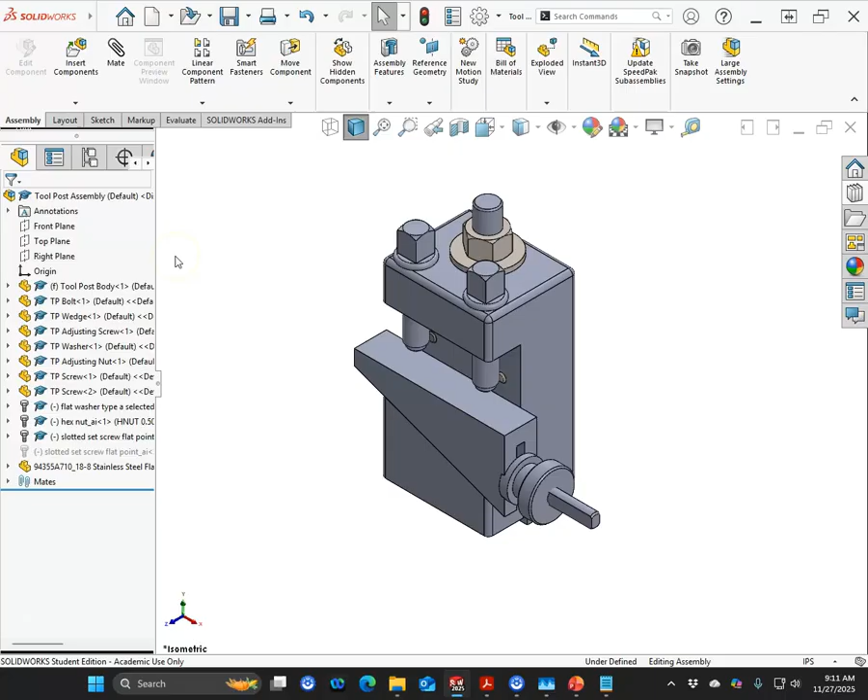All right, we're ready to start our working drawing. So your choice, if you have created a template, then you're welcome to use it. Otherwise, we will use the drawing.

When we hit OK, it's going to ask us once more if you are only seeing the ISO versions, then it will only show standard based on the standard. And if you're using the ANSI standard, it's going to default and you won't see any of the ISO. So I'd recommend if you're going with this default template that you use the B size, just because it doesn't take up as much real estate for the title block.

All right, so it did not launch the model view since I told it previously not to. You are probably looking at something like this. So if I check that box, this will come up automatically. I like the option to be able to do model view or go to the view palette.

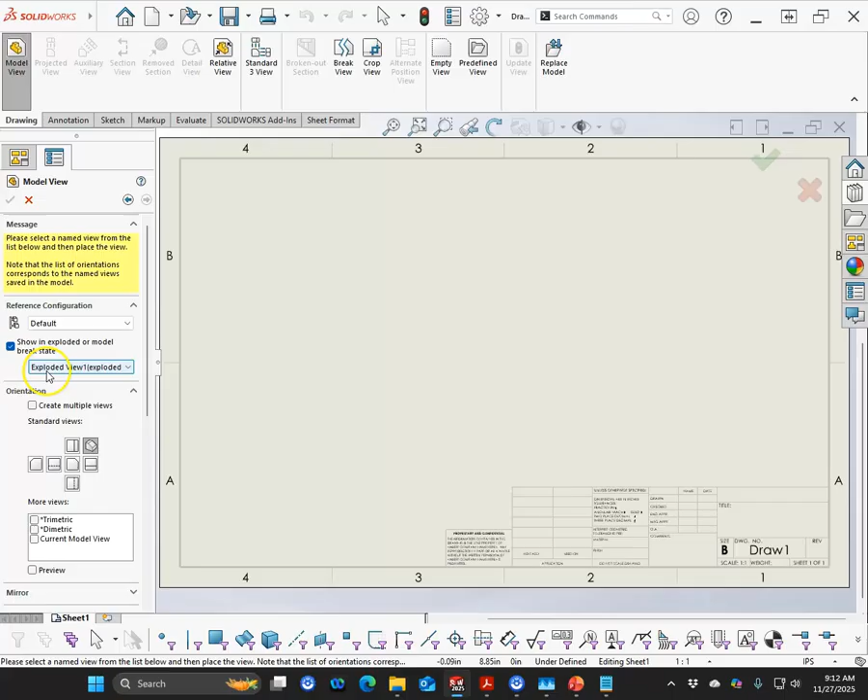So the tool post is open, so we can just go to next. I would like to show it in the exploded state, and there is the exploded view. We really only need the isometric for our first sheet, which is going to show the construction.

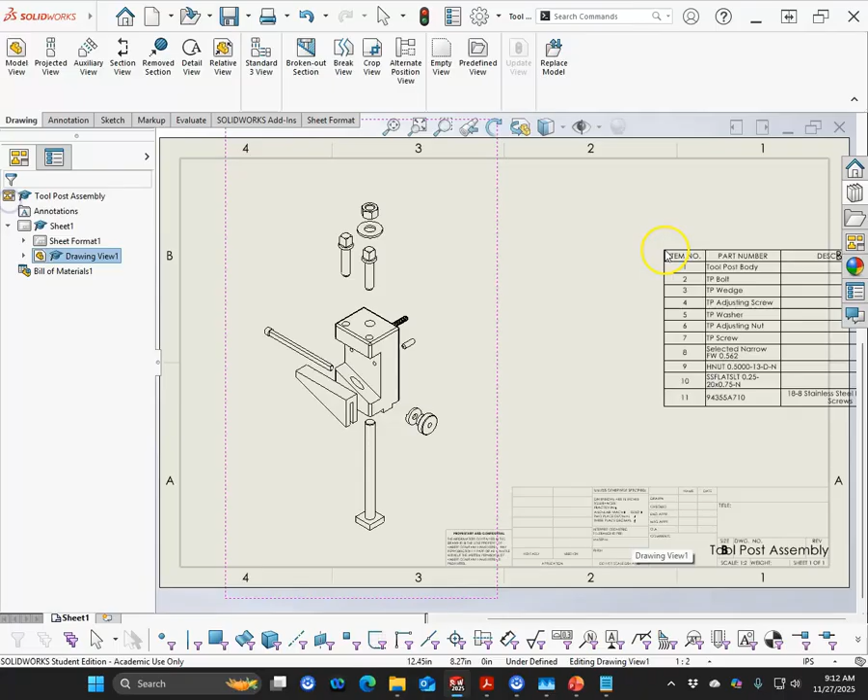All right, so if we right click and go down to the tables, we're looking at the bill of materials. We need to check, we're just going to do top levels. There's not a lot of sub-assemblies here. So the description, this one did get a part number and has more on the description. So we'll go ahead and leave the description this time.

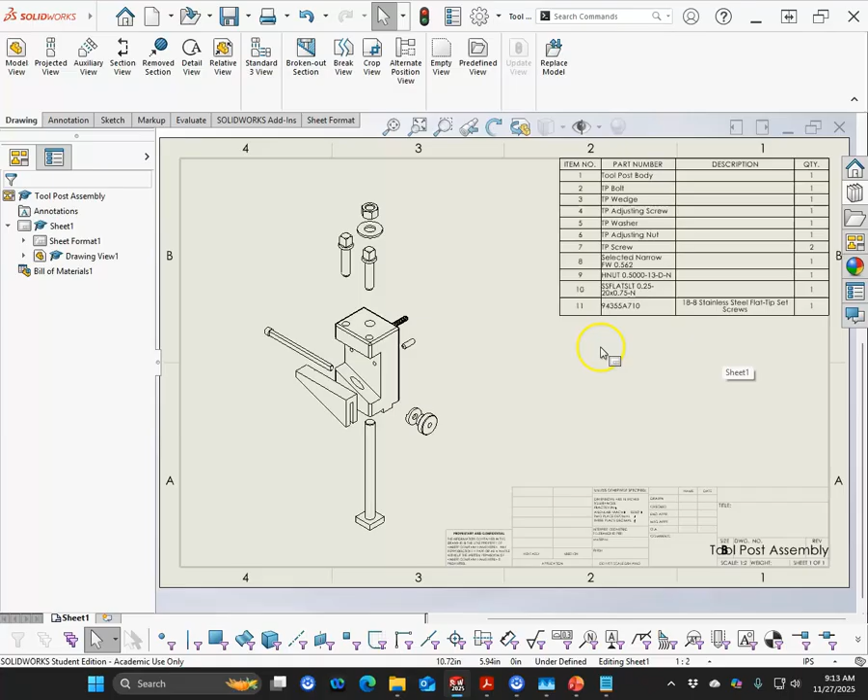We might want to put more in for the washer. SolidWorks abbreviates. Most vendors have no idea what a stainless steel flat slotted set screw is, or the narrow flat washer or hex nut. The abbreviation just doesn't translate well.

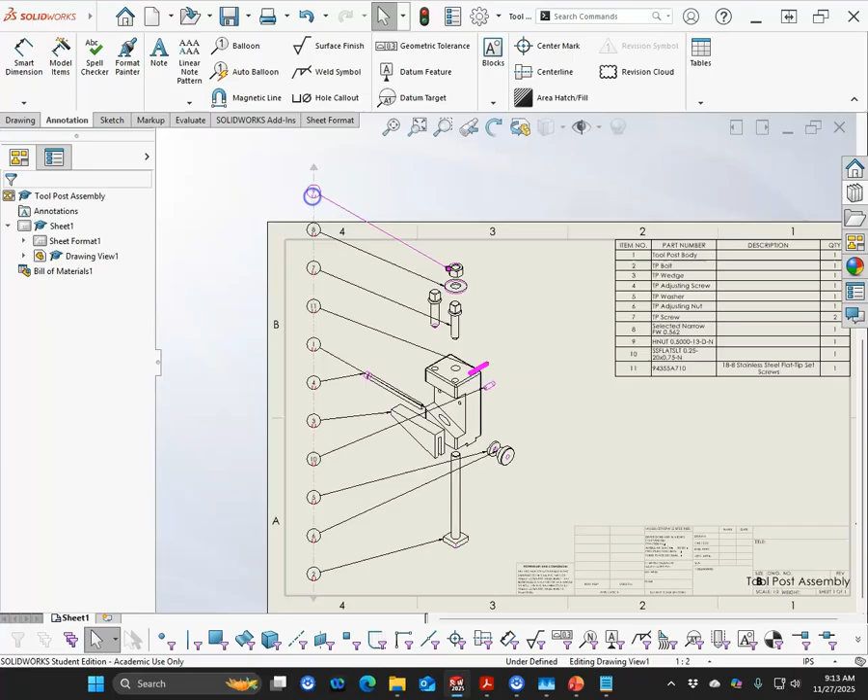All right, so in our annotations, we're going to be looking to auto balloon. I think on this one, I'm going to stack everything to the left, which doesn't look terrible. There's a bunch of stuff crossing, but I think that'll be okay. And when we highlight, we'll be able to take the magnetic line and drag it just a little bit to shrink and stretch those. 1 and 4, those are a little too close for crossing over, so we'll call that close enough.

So on the view palette then, if we refresh, well, I guess I need to pull down and do the tool post, and then it refreshed. I would like just a standard, maybe we'll go dimetric, and we'll put in a dimetric view just to kind of show the collapse state. And I guess it fits in there okay.

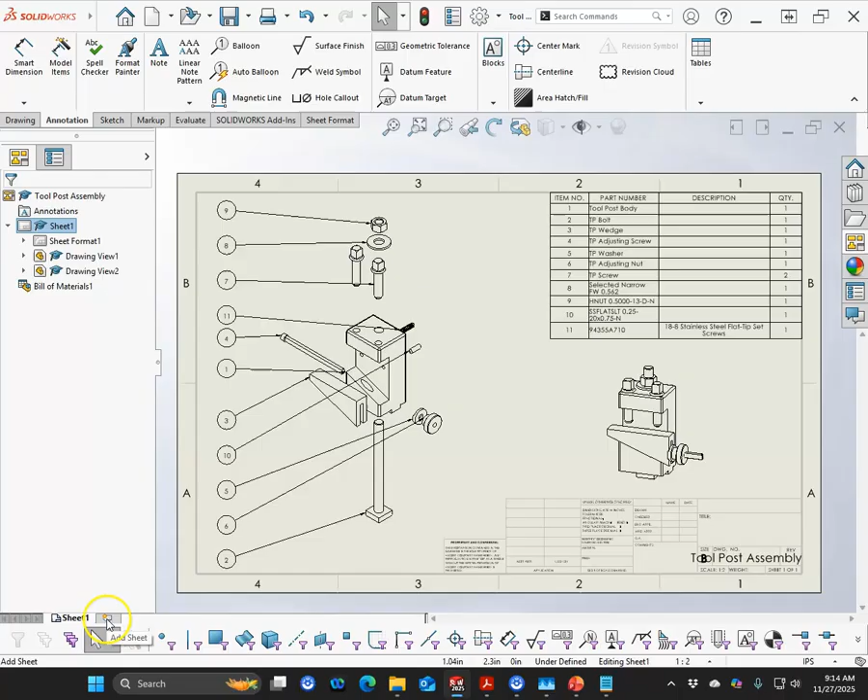All right, so at this point, if you want to do single sheets, you would save this, open up another drawing sheet, put the part in. I still tend towards the multi-sheet, so I'm going to come down to the bottom left and add sheet, the little icon at the end of the row. And then we can go back to the view palette.

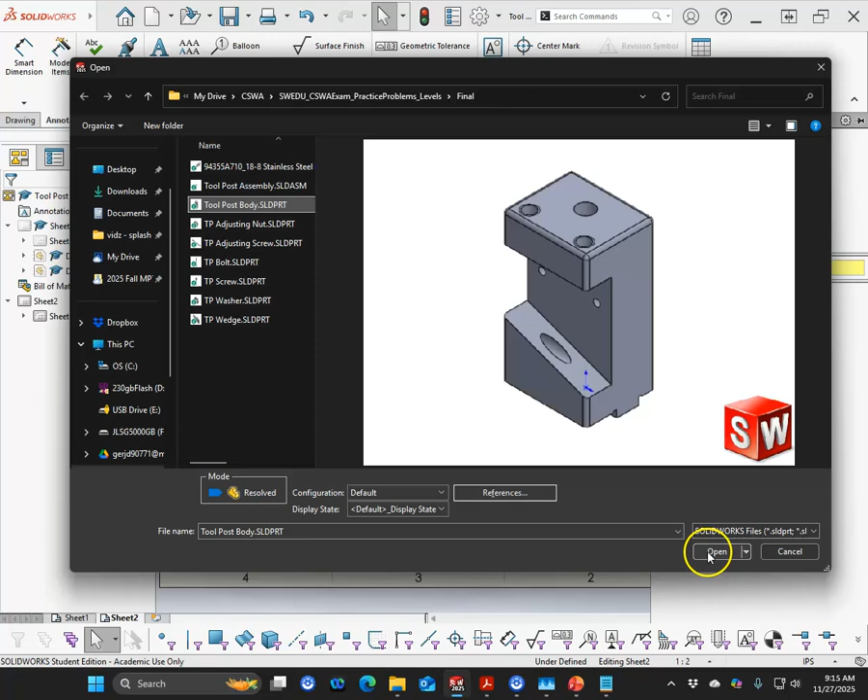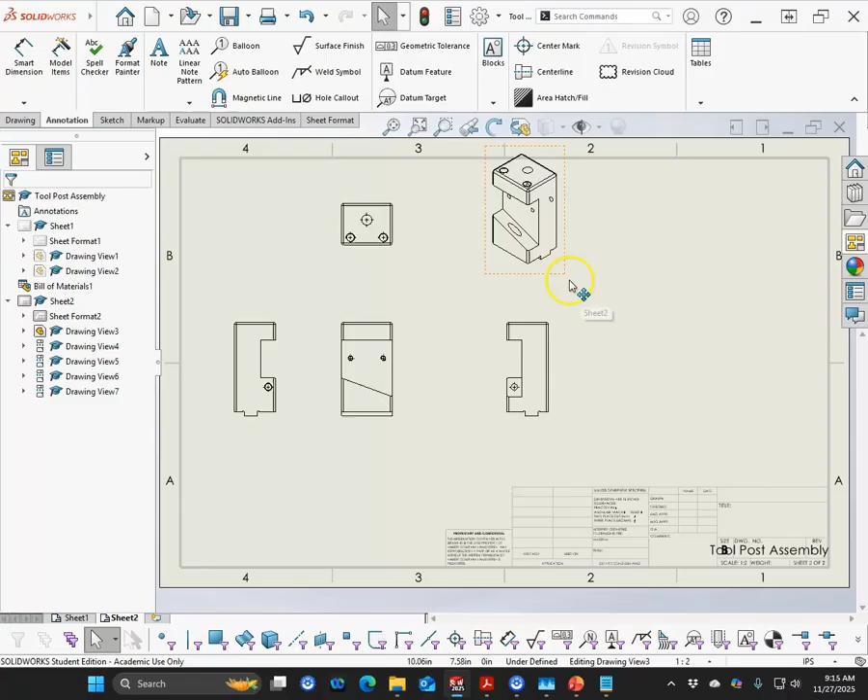And if I use the ellipsis, the dot, dot, dot, then we can bring in the tool post body. And I would like the front view, the right view, the top. Probably not going to need a bottom view, but I would like to detail that a little bit, and the isometric. Okay, so that gives me pretty much everything. I don't know that I need the back view because those are going to be tapped all the way through. We just need the location for them.

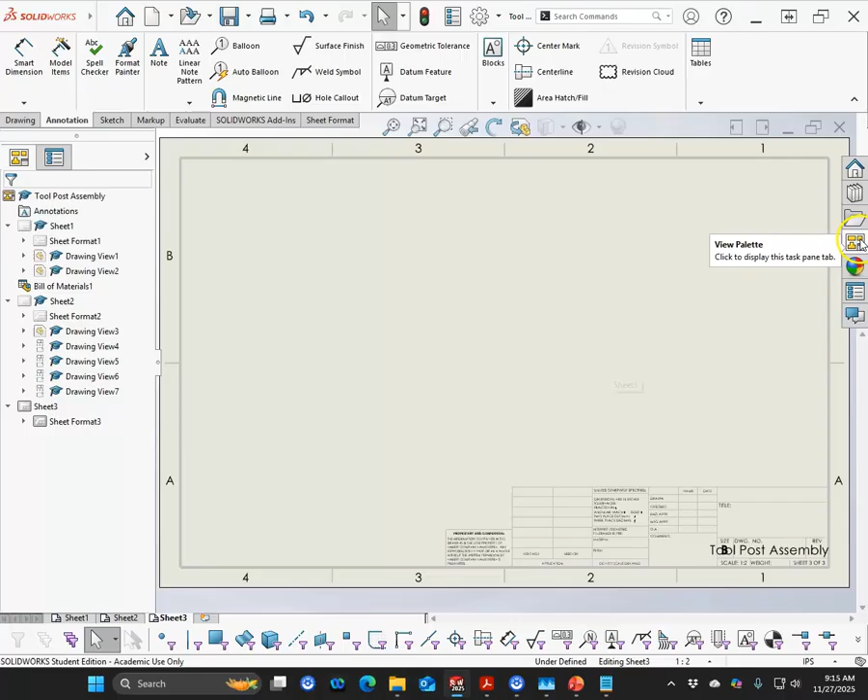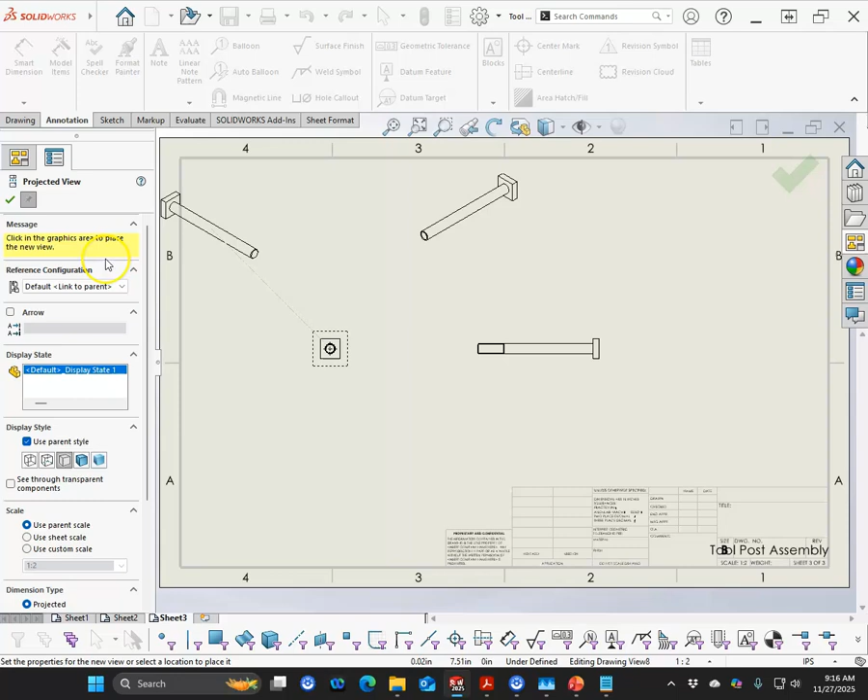Maybe the tool post will be next, so hitting the add sheet to bring in the next, we'll do the dot, dot, dot. And the bolt is going to more than likely be a manufactured part. So even if we modify it, that's interesting, that view. Okay, yeah, I'm okay with that view, just making sure it's not flip-flopping on me. We'll go ahead and bring these in, and then on the next pass, I'll worry about setting the scale.

All right, so we had the wedge, and so the wedge we can do a front, a right, an isometric. I don't know that we need to do a bottom.

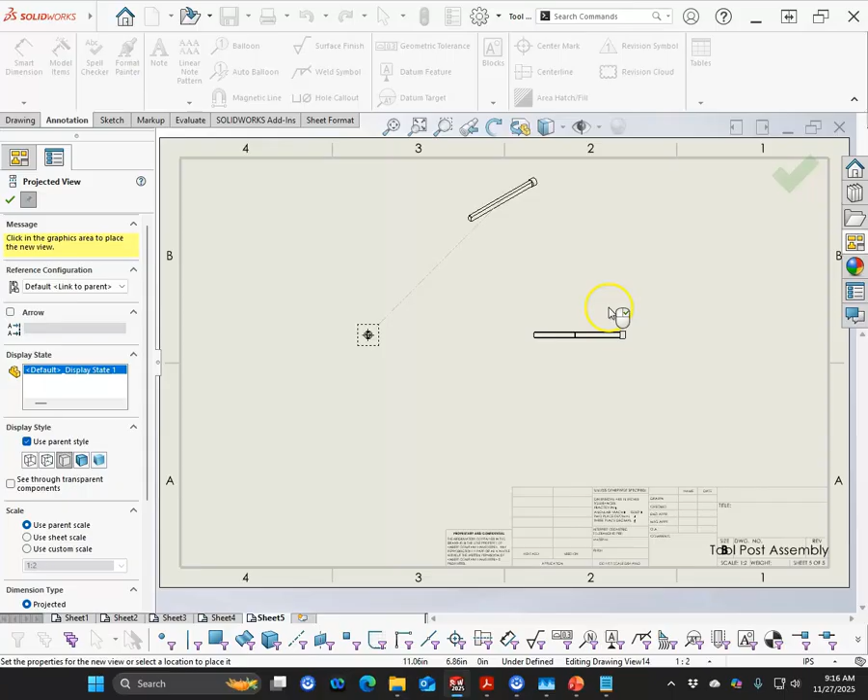So let's, oh, that was the open. I needed the palette. We're going to go to the adjusting screw. And if we go to the right side, again, those are a little bit on the small side for this size sheet, so we'll adjust the scale.

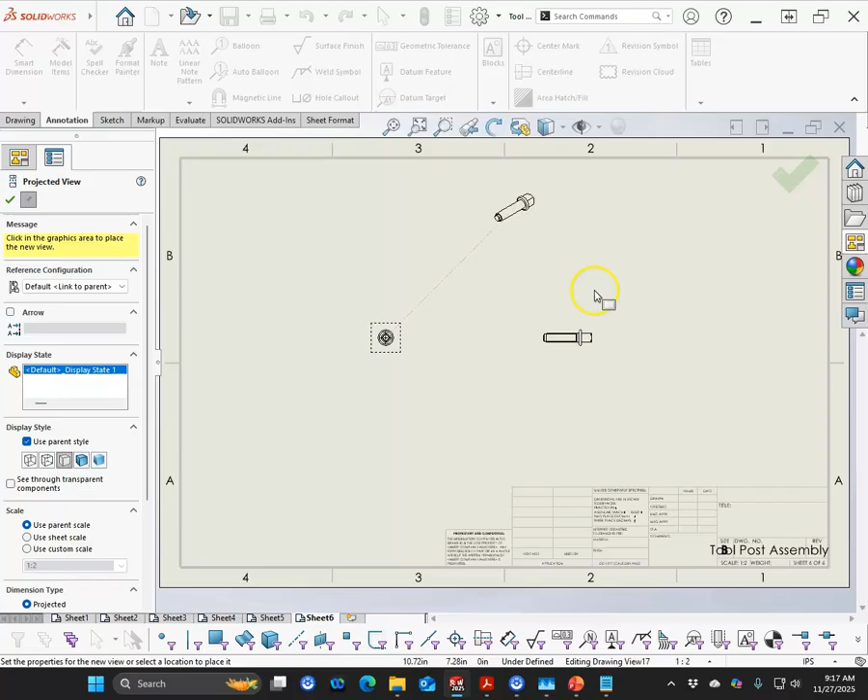So just going around, realistically, this is a really nice piece, and we may be able to find, let's go with bottom, but we may be able to find one of these with a square nut in our vendor. But nowadays I would look at this and go, this is going to be an expensive little piece. I don't know that I can replace this with a purchase part, this one's going to be, on our cost-effective scale, going to be one of the first ones to get analyzed if there's really a necessity to have that

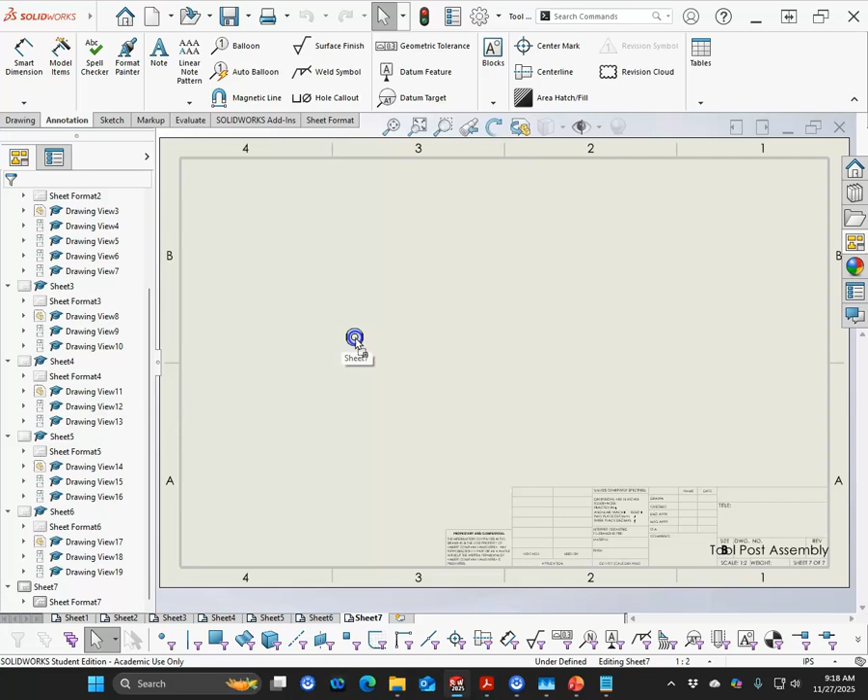that flanged square nut. All right, where did we make it over to? Probably the washer. So let's go to the front. And we'll do something like that because I'm thinking I will probably rotate this just so I can see the side, but I don't know that there needs to be anything different there.

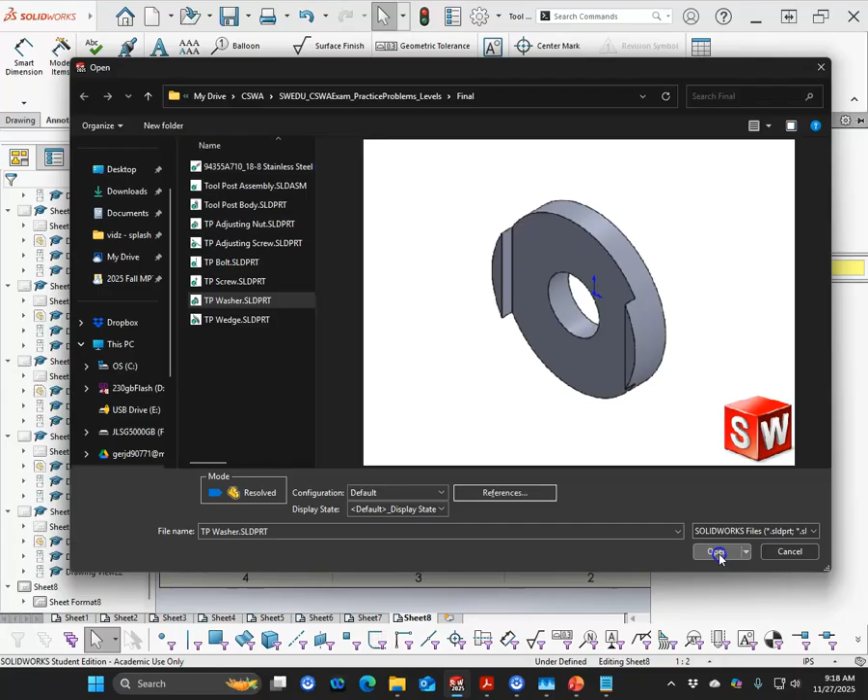And one more, I think we'll have everything. The purchase components, I'm not worried about bringing those in. Oh, that was the washer again. So let's just Control Z.

We need the adjusting nut. There we go.

Okay, so front. Let's go to the back, to the side, to the isometric. Nothing on the interior detail that I'd really need a section view.

So I have the assembly, 1, 2, 3, 4, 5, 6 components. And in my assembly folder, just going to do a check real quick that we have the assembly, 1, 2, 3, 4, 5, 6. And yep, so 1 and 7. All right, that makes sense.

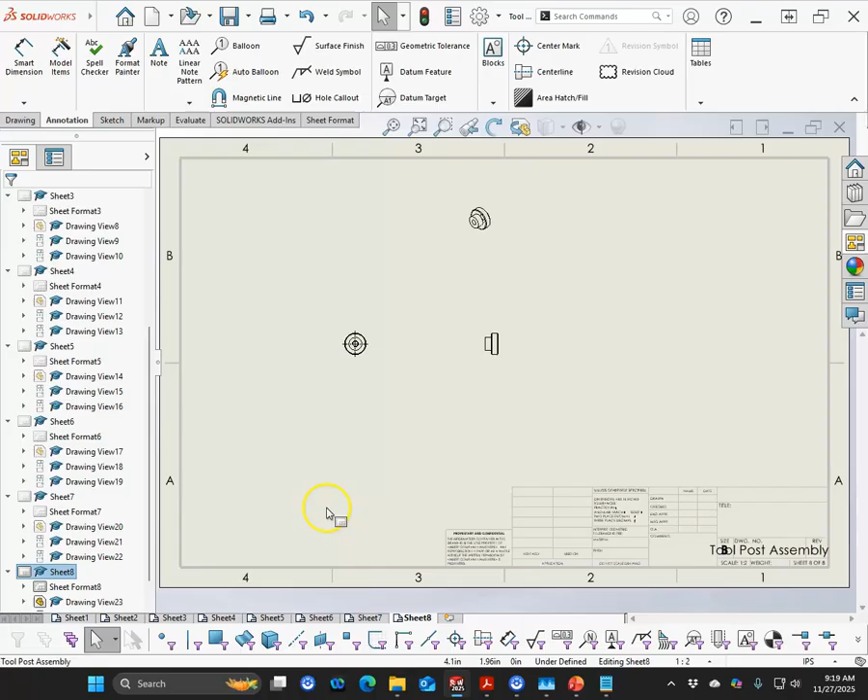So if I'm missing anything, I'll come back and pick it up. We can go back to our list. So the tool post body, the bolt, the wedge, adjusting screw, washer, adjusting nut, screw, and then the set screws.

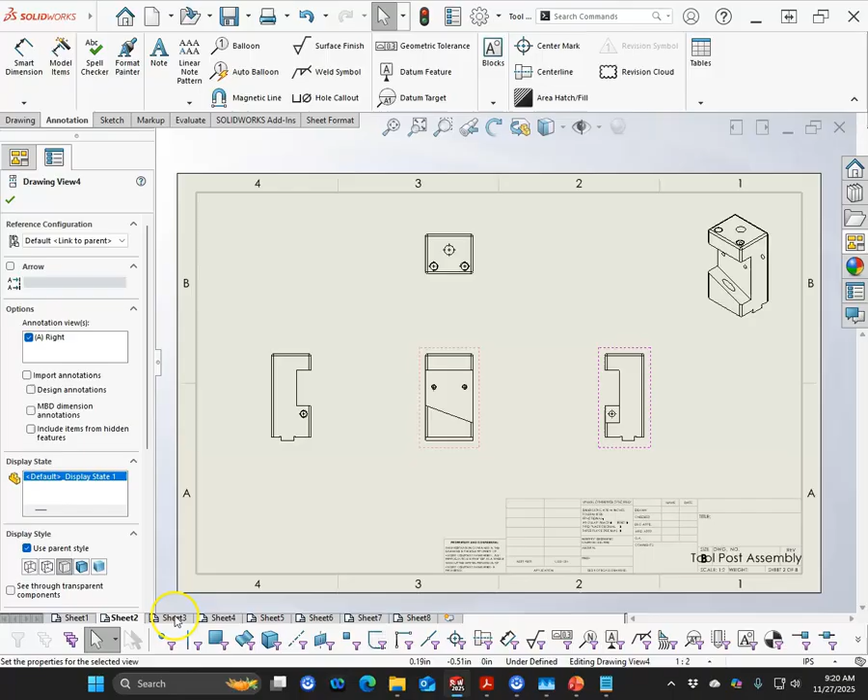All right, so that one looks reasonably well sized. Don't think that we're going to need anything different there. Let's go 1-to-1 with this. I'll probably go with the isometric view back to a half scale.

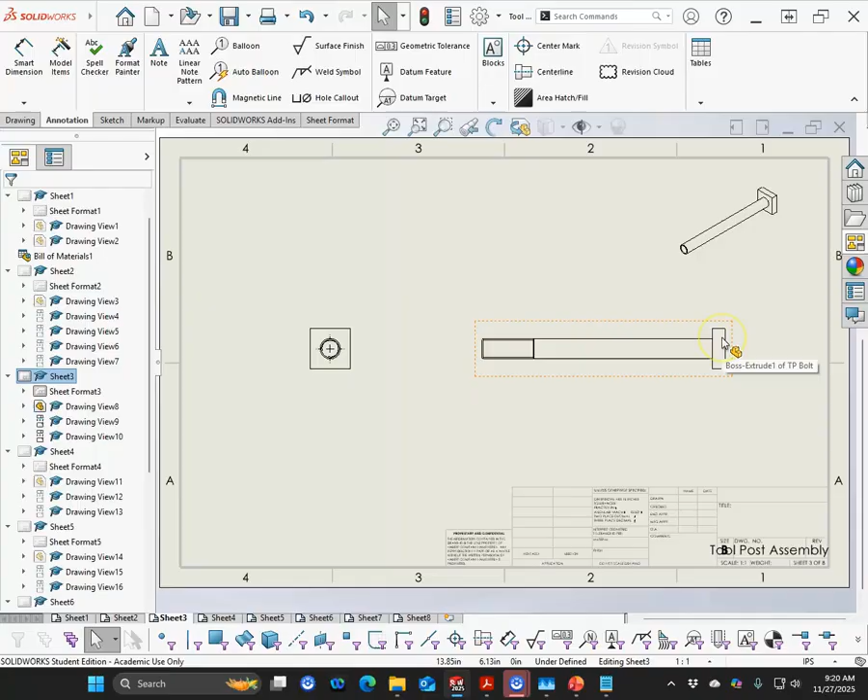I mentioned on the manufacturing side of this would be one that I would consider making the shaft with the thread and then the block, and either pressing the two together and welding it, because removing that much material to make the shaft and the thread falls back into the is it cost effective question. I think we could probably weld it or secure it in such a way that it provides the clamping force we need to position the tool post.

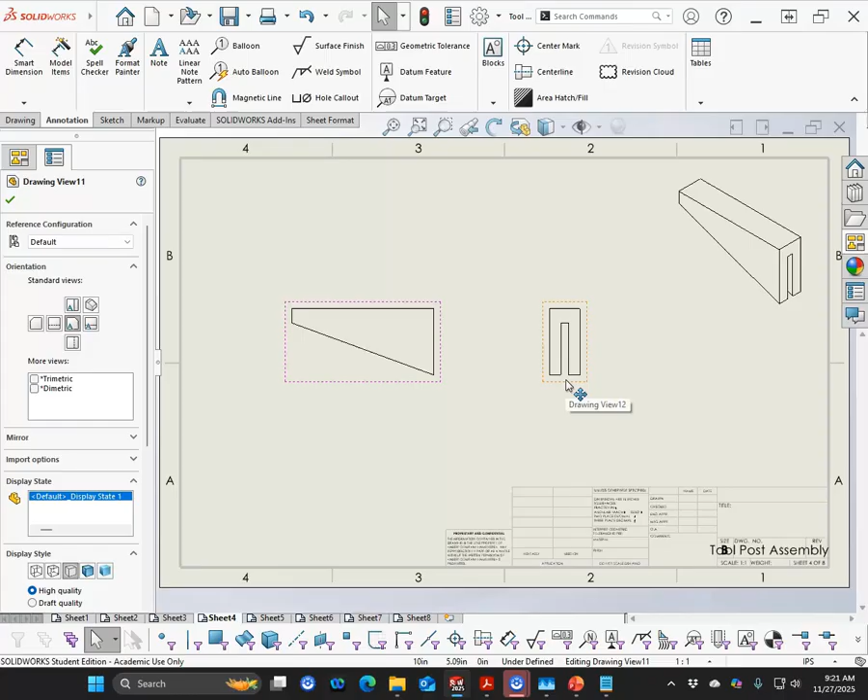All right, so those all look pretty good. I think we got enough room. With the alignment, notice the front view is going to be the parent, and the child views are going to move with it. So whenever I move it, I see that little line indicating that it is a child view.

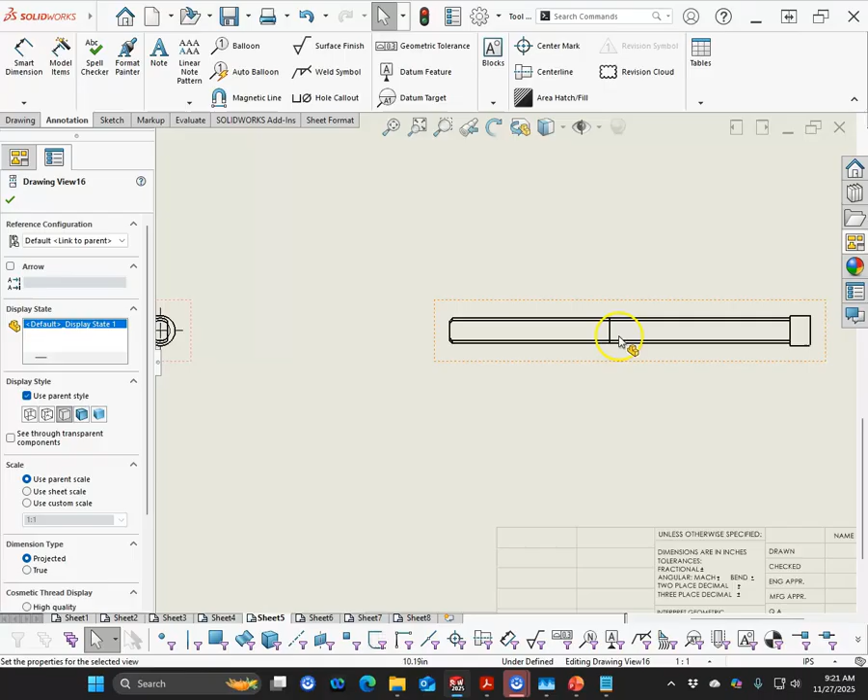So let's go back to the one-to-one, and even that one may be a little bit small. So don't know what that line is - the cosmetic thread. The cosmetic thread did not go all the way down. All right, so that's an indicator that I need to open that part up and make an adjustment.

So on this one, maybe we would go 2-to-1, so we have a better view, but that one looks a little bit big. So let's go to the custom scale and 1-to-1. And same thing, let's go to 2-to-1.

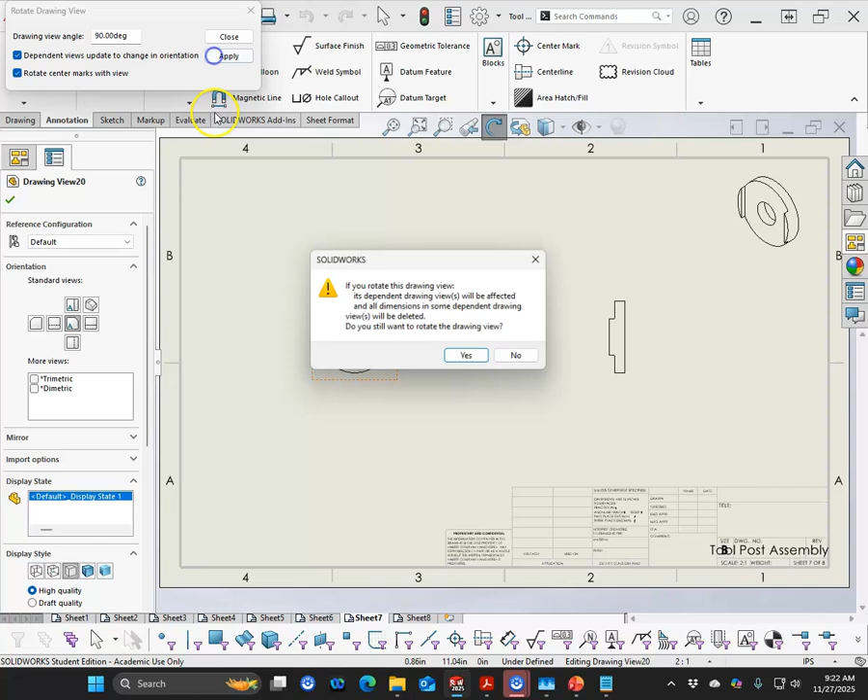And that one I don't see as being very intrusive over the view, but I do want to rotate that. It's always going to warn you whenever you rotate, so try to do this before. So now I have the ability to dimension that, but if I had applied dimensions to this and went to rotate it afterwards, it would delete those dimensions.

And then the last one, again, we'll go 2-to-1. All right, so I think we've got everything. So going through this process, setting these up, let's go ahead and save this. This will just be the tool post drawing.

Again, name them what makes sense to you. But going through this process, my first pass on the drawing just kind of gets everything in. The second one, we set the scales, add additional views if we need them. Then I have the exploded view and my bill of materials to refer back to and see if I've missed anything.

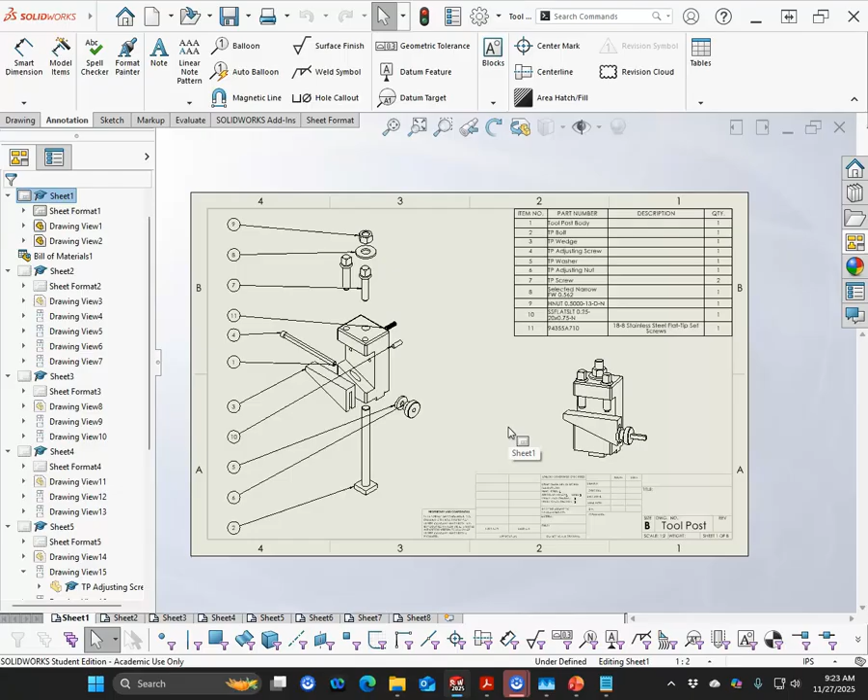Again, the 3 purchase parts - actually 2 purchase parts - we're not going to mess with as far as making a drawing for. We've got a part number. We're going to put a part number in the description of what we've selected, and that just becomes something that goes through whatever that procurement process is.

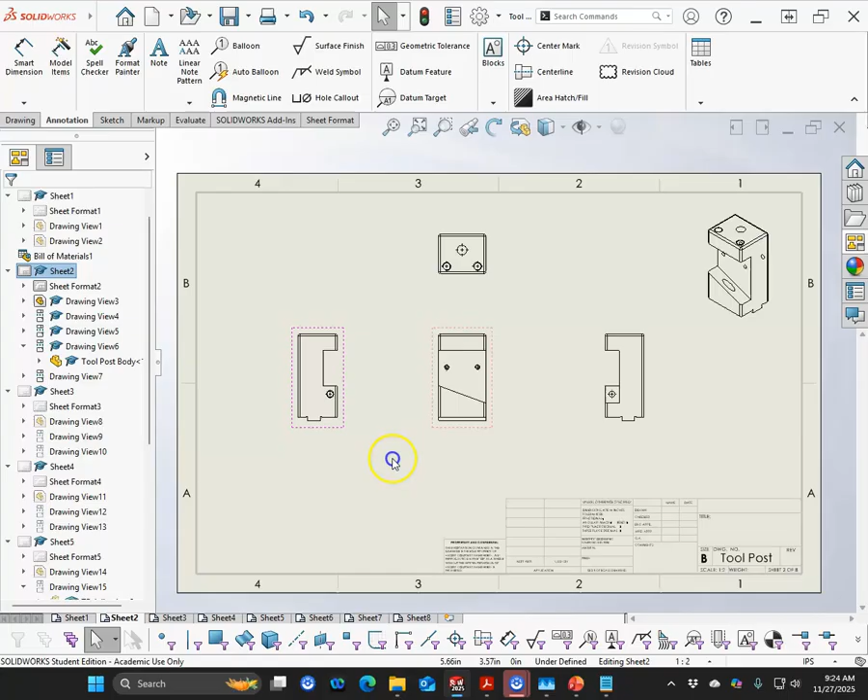All right, so again with the alignment, notice that the parent view kind of moves and the other views move to it. If I'm moving just one, it's showing it left and right, will not move up and down. So we haven't had a need to break alignment, but on the right mouse button there is an alignment option, and we can either add or remove alignments if need be.

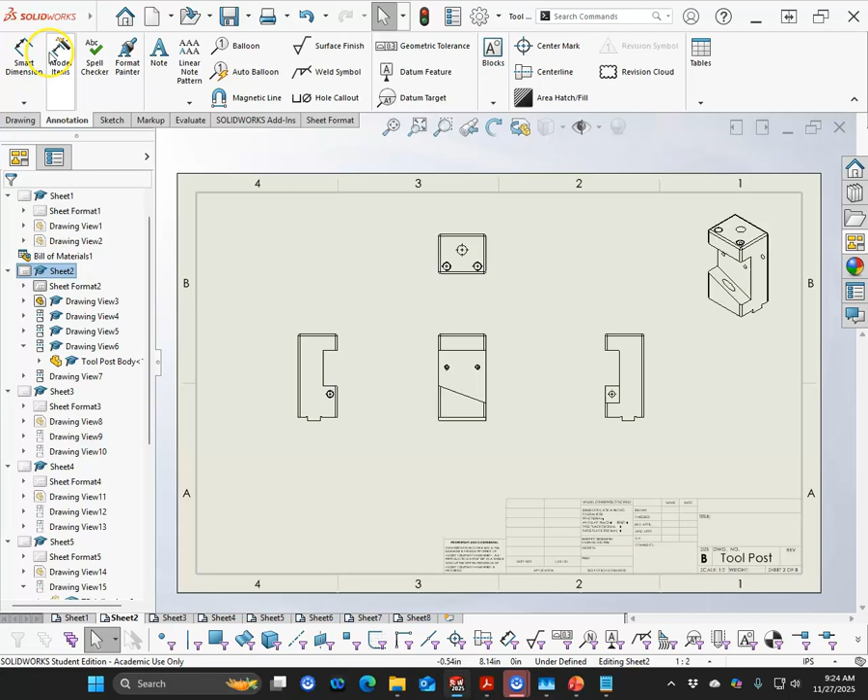All right, so we're ready to start putting dimensions in. The requirement for the final is that you put enough dimensions in to show me that you have a pretty good understanding of the process.

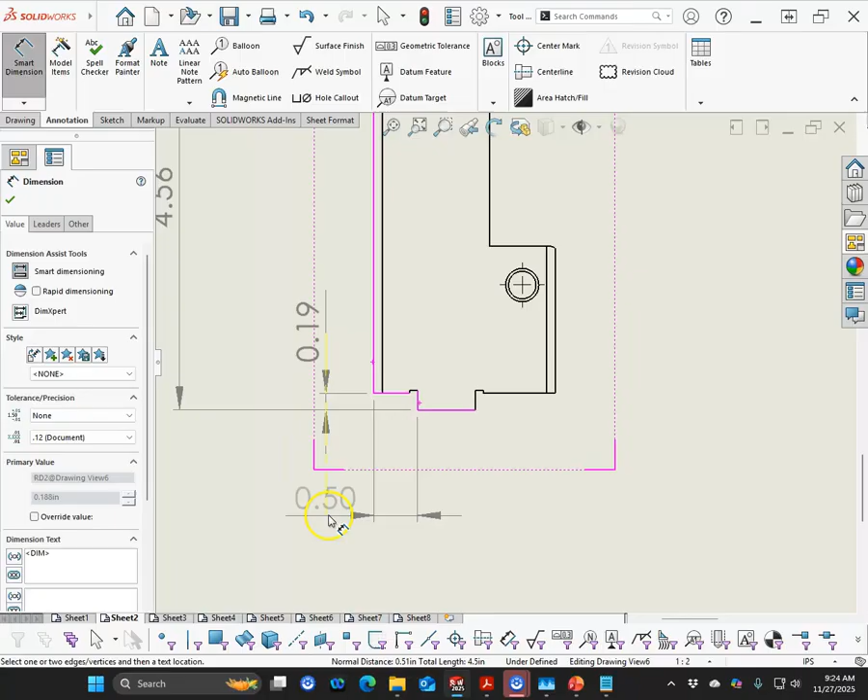I'm going to go through my normal process, what I would do for just about any drawing, which is to just get the dimensions in and then refine the process, since that's probably going to be a toleranced item there. We'll bring it out. Normally I'd pick the baseline and just go to that size, but the variation, we'll see what happens there. All right, so the overall, and we already have an overall there, so I don't need it.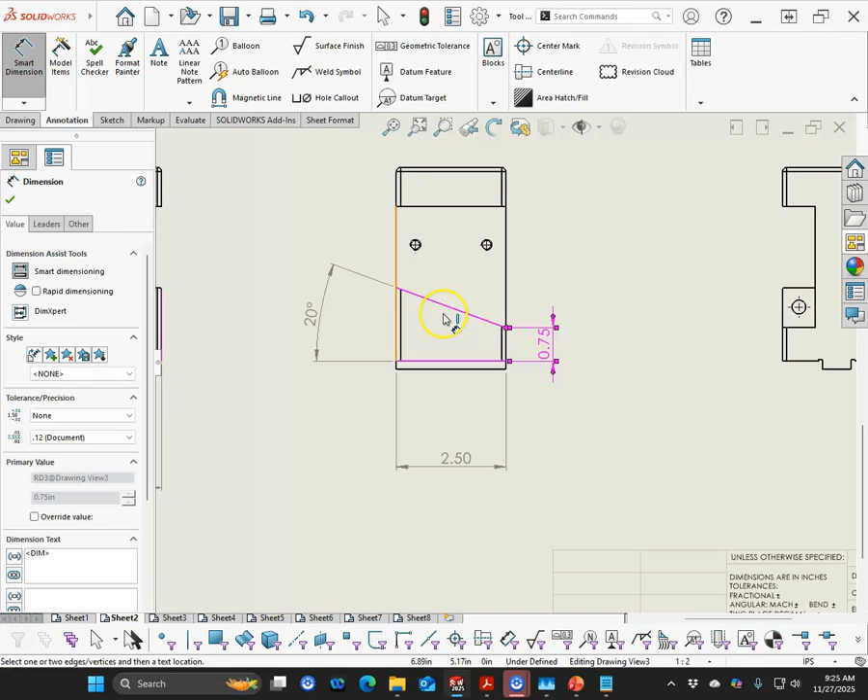We will need the angle. And let's go with a distance from there to there. Really that can float, it doesn't have to be too exact. The one thing that kind of jumps out is I will probably need a detail view.

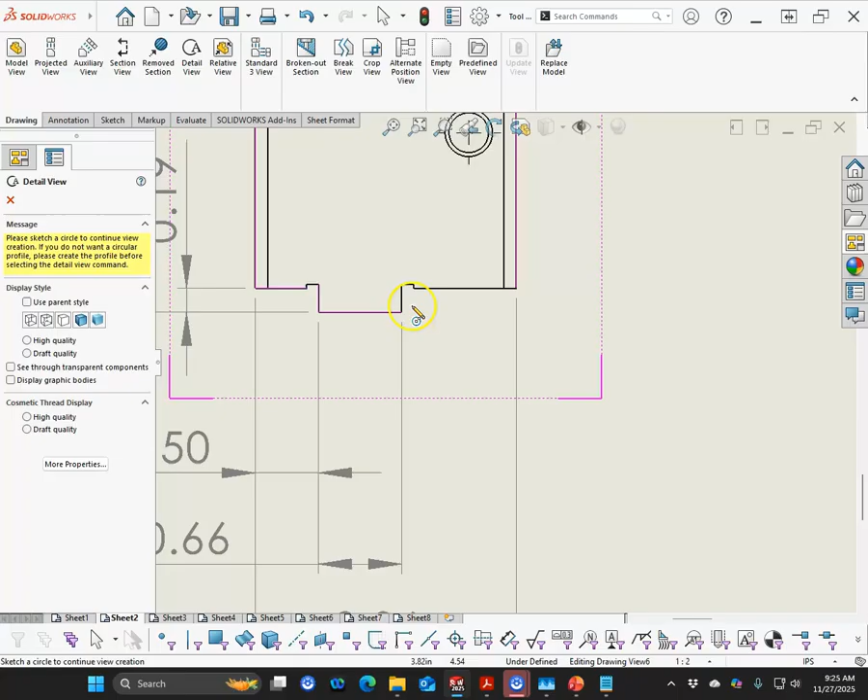So let's go back into the drawing, and we're going to pull a detail view so that we can highlight that item and make it a little bit bigger. So the custom scale, let's go up to 2 to 1.

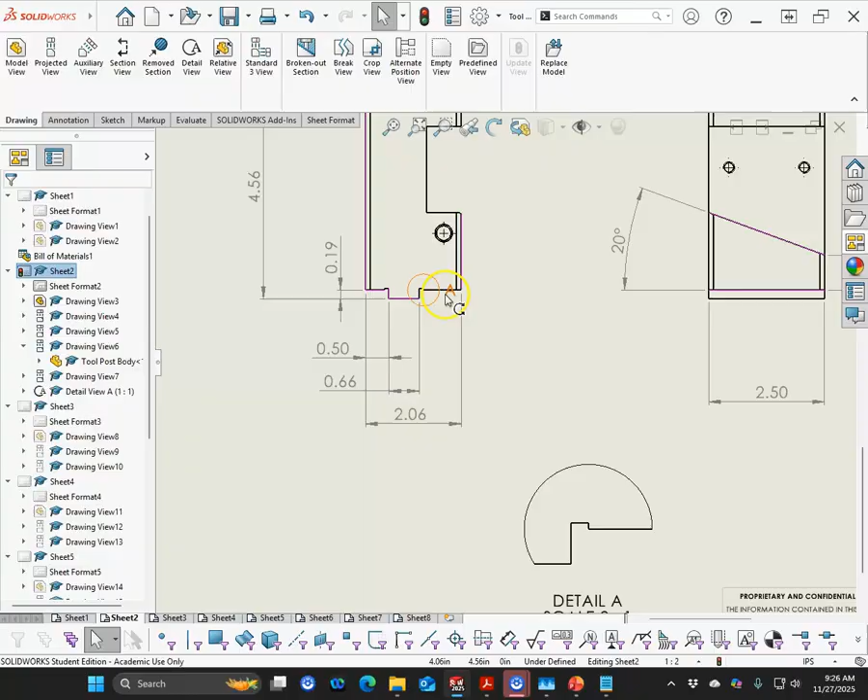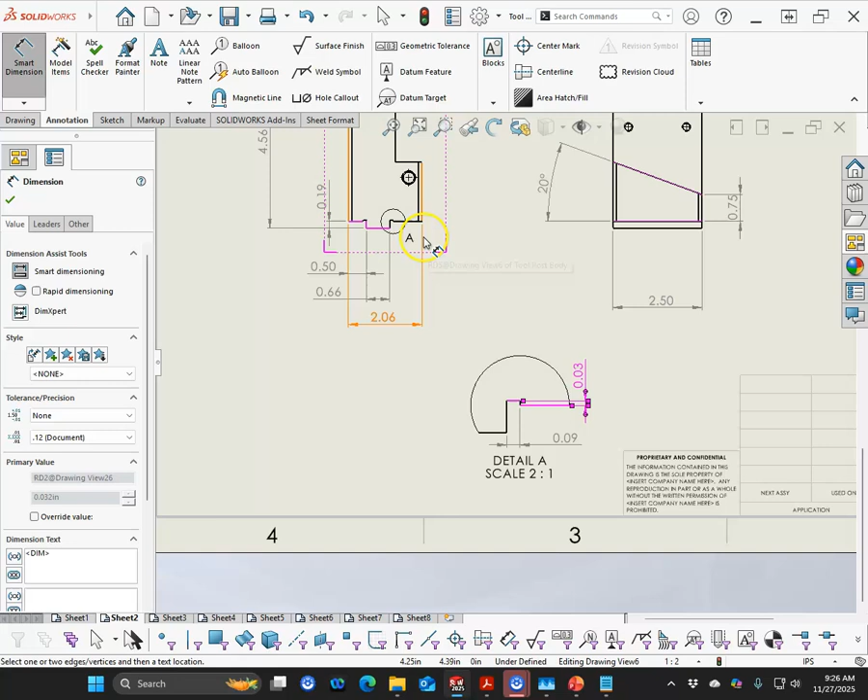And we'll pull the label out a little ways. The reason for that is it's not overly critical, but we just need that relief so that whatever slot this is sitting in, that geometry doesn't hit a sharp or try to rotate it or generate any kind of angle because it doesn't seat correctly.

On these guys, probably will pull them again. I don't know that they're that critical, and since I got the angle, that means I got the center mark. And we just need a couple of location dimensions.

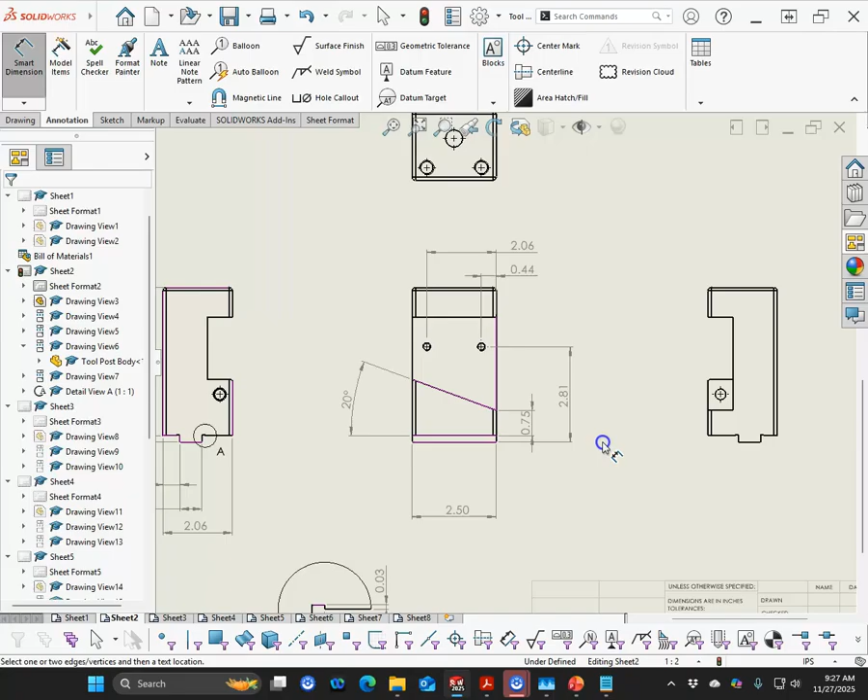If you're using the ANSI standard, yours are going to be inside of the center line, or on the outside where this ISO lies on top of it. Not sure what the dot was there, but we'll go ahead and put these in.

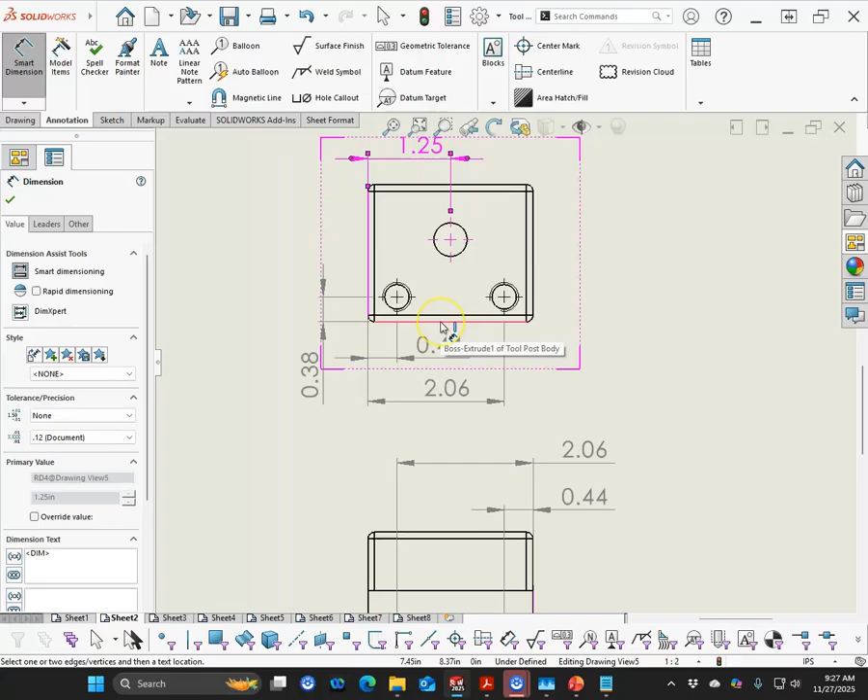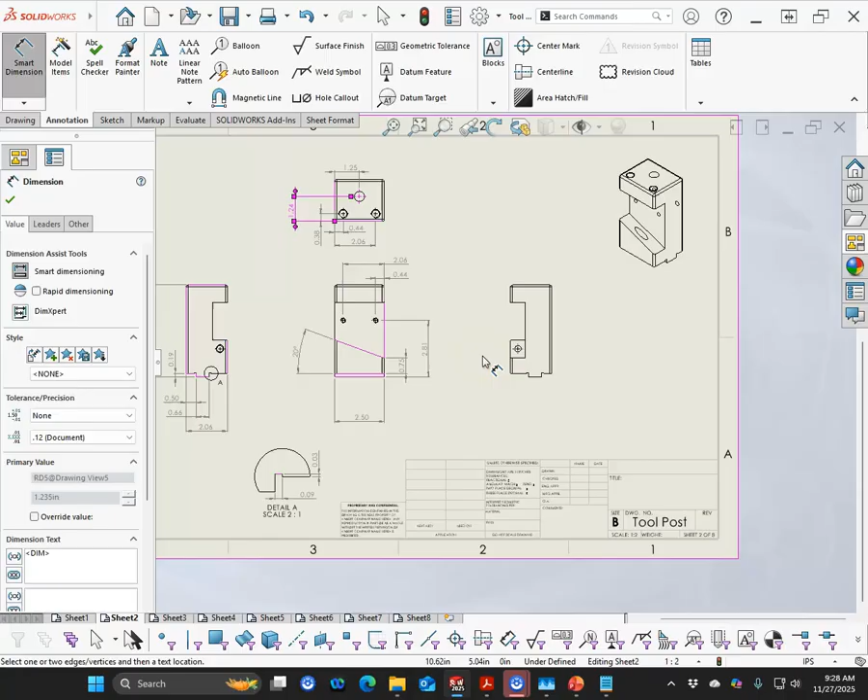Since I pulled that off of the front, we'll just go ahead and make that the datum. All right, so we've got those. Comes back to what do I need to do on this one? Actually, it's kind of looking like I don't really need that view, but let's go ahead and leave it for now.

Yeah, I want to put something over there. I'm just not sure what. I'm going to say maybe this tolerance for the plus minus dimension that we'll need on that.

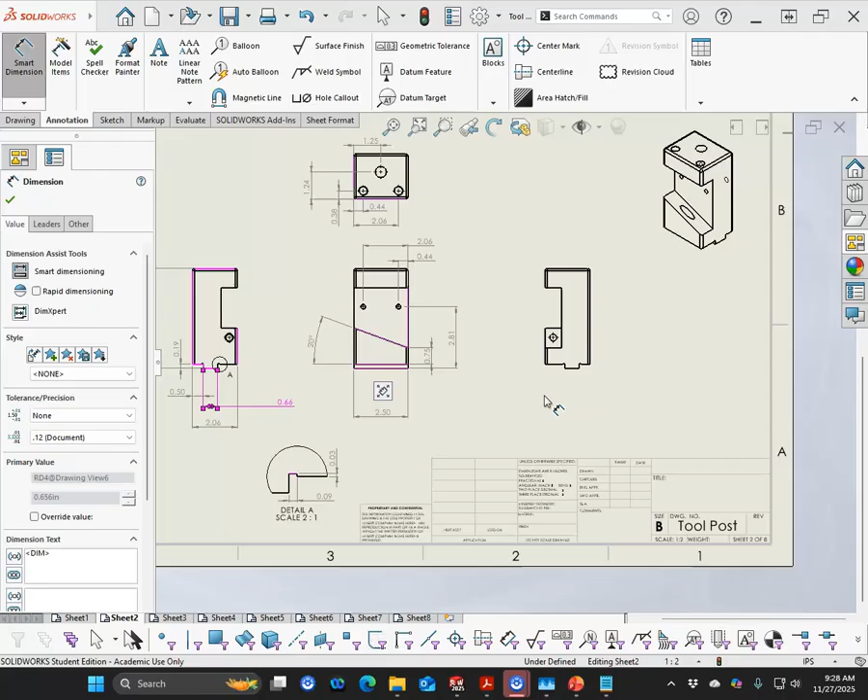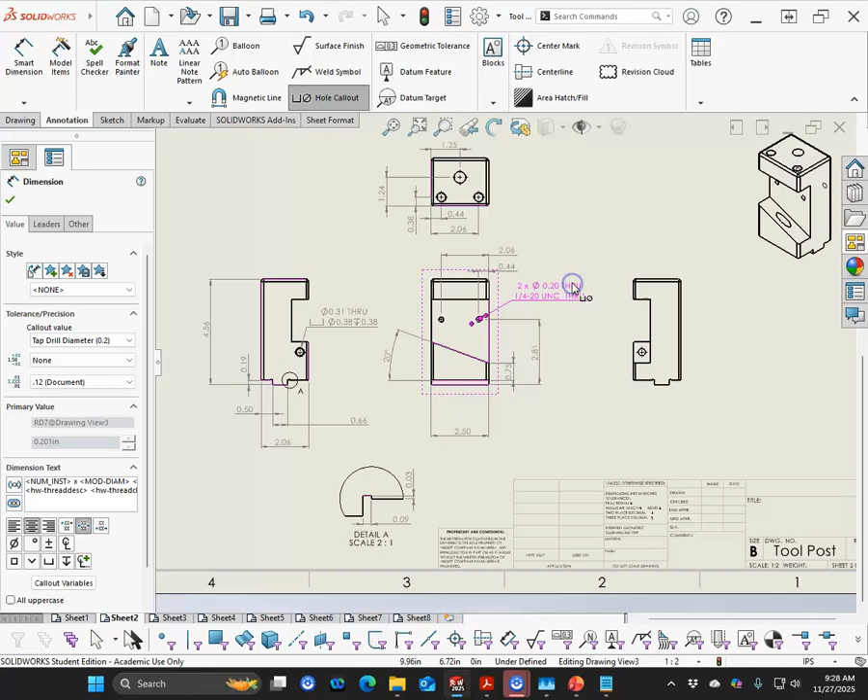So the other thing that we need to do then is go to the hole callouts. The hole callout is going to combine these up and give you the counterbore, the through hole, the tapped holes, also the tap drill if one is needed. All right, so we've got all of those in.

If I don't find any dimensions to put on this one, I'm pretty much just going to need to delete it. I do like the layout otherwise. So let's move on to the next.

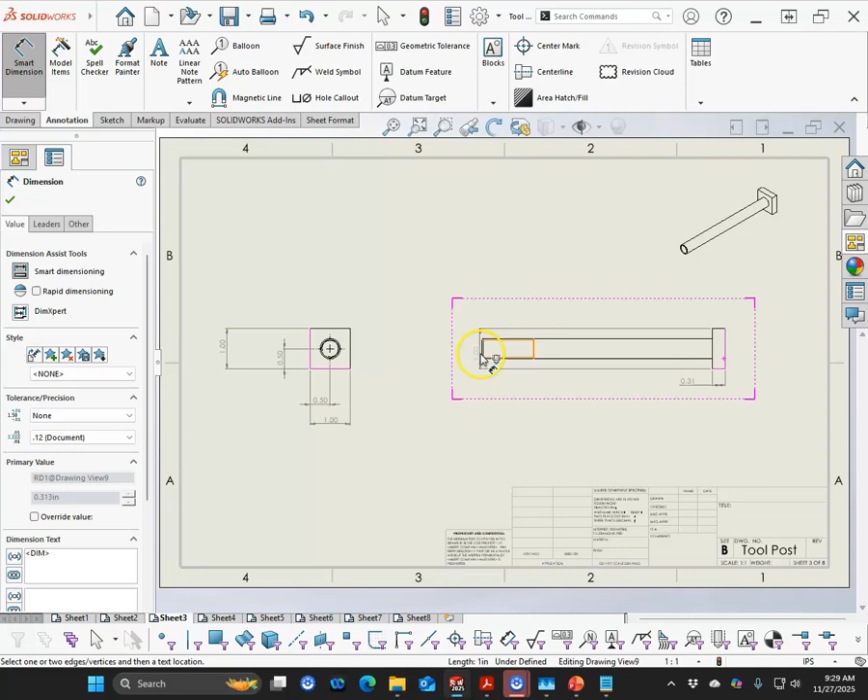And we're going to go to the square. And then we'll have the length and the overall. All right, and then let's go to the more dimension, and the more dimension at the bottom will be the chamfer. So the chamfer and then one of the faces.

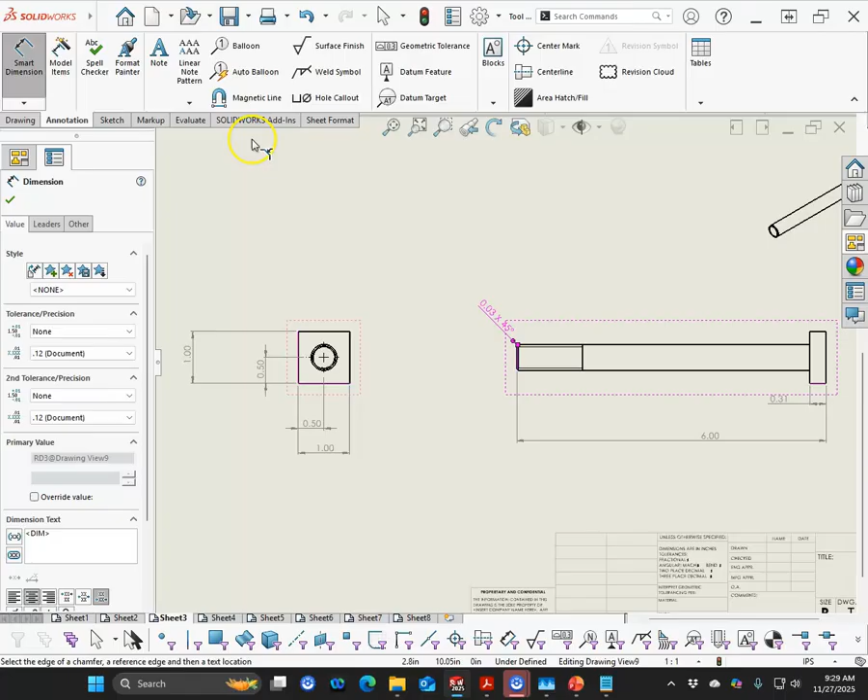And we will also see if the hole callout will do. Nope, I think it is just the dimension. I always try to do the hole callout there.

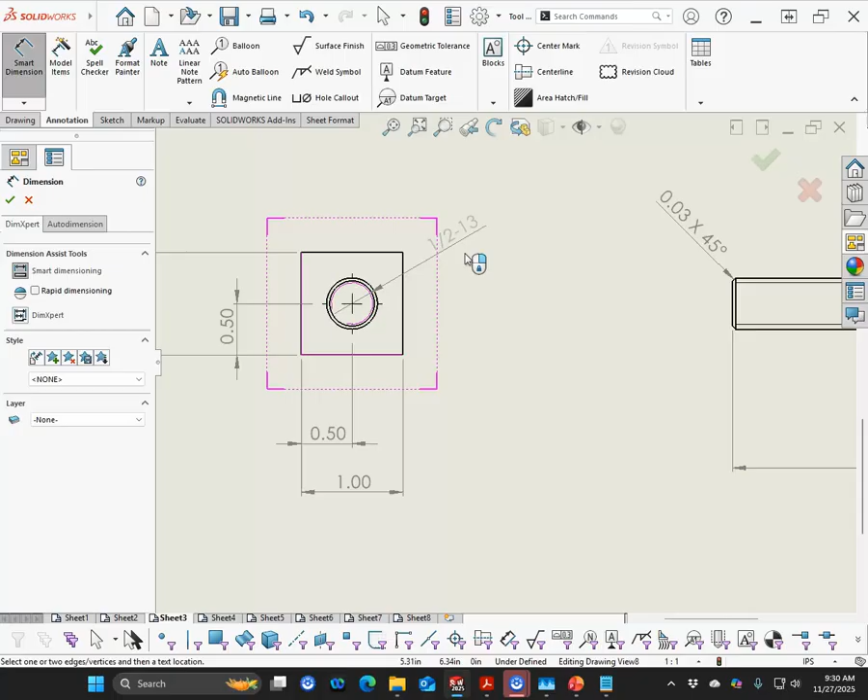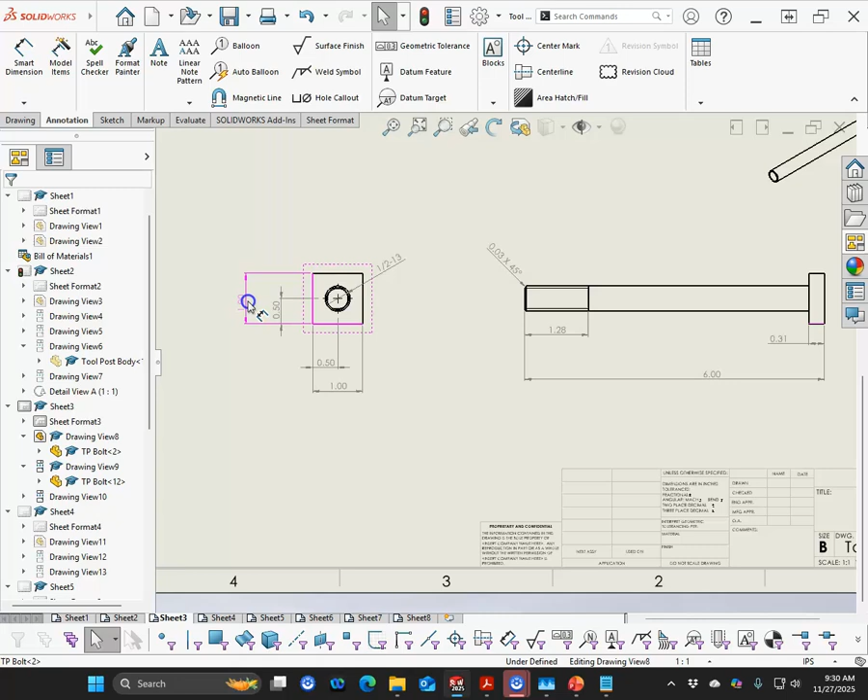And we'll set those to the half 13, but it did not give me a distance, so we need to pull the distance over here. All right, so that looks pretty good. I'll line those up a little bit better.

Okay, into the wedge, overall distance, the angle. Let's set an end for reference. Now this, we remember, was our tolerance dimension, so it actually needs to be 3 decimal places. If we're going to leave everything else at 2 decimal places, then I need to override that one.

And then also look at its being, I think they did those as limit dimensions. So minus 0.002. Or actually, no, we need to grow that one or allow it to get bigger, because then the shaft is going to be allowed to get smaller.

All right, and then the width dimension. So if I think of those gap tolerances on this pass, then I will go ahead and apply them, but really the next pass is where we go through and we do the fine tolerancing.

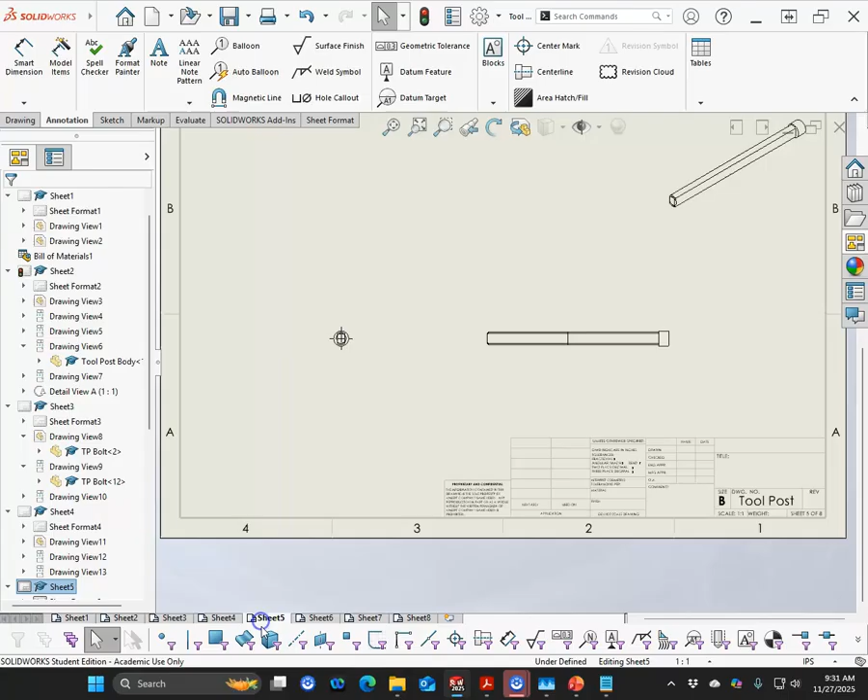So we have our dimension, and actually, let's see what this one looks at as. Looks like it's 2 to 1. Yeah, that's not bad. We'll probably take that. And custom scale, that can go back to 1 to 1.

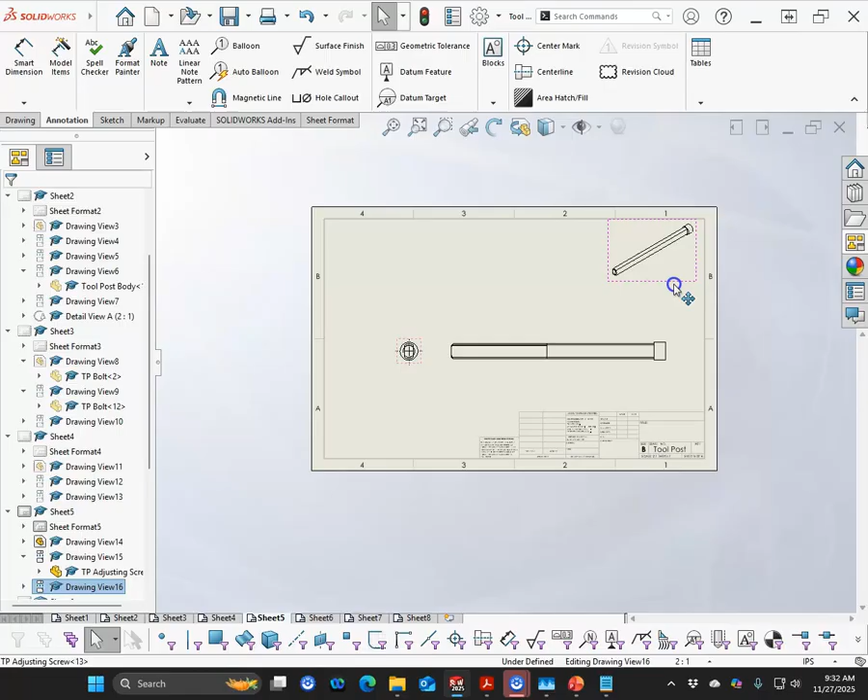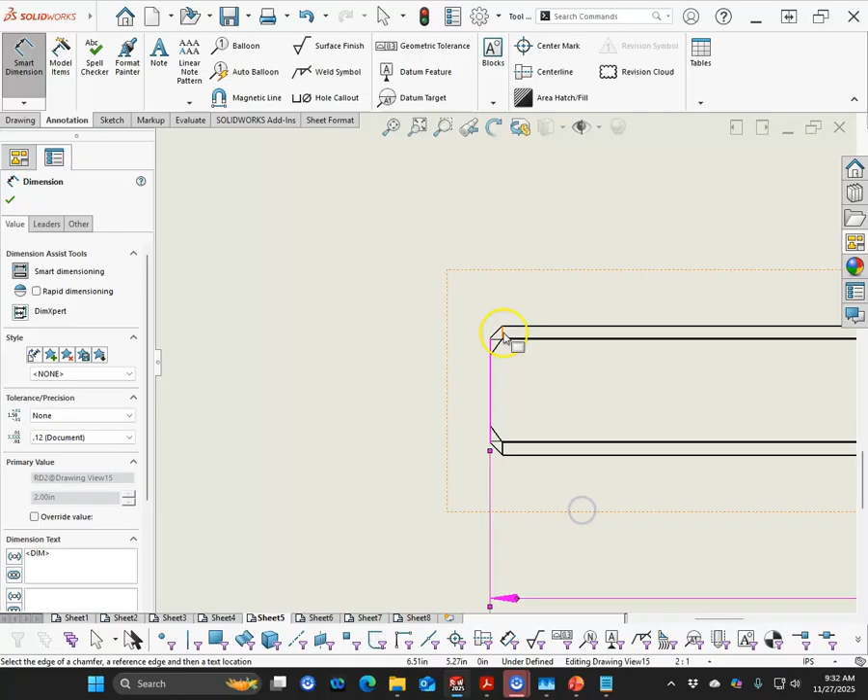And we have the 4.5. Let's see if we can pick up the chamfer from the model dimensions. Let's see the head size. Oh, that's not a chamfer.

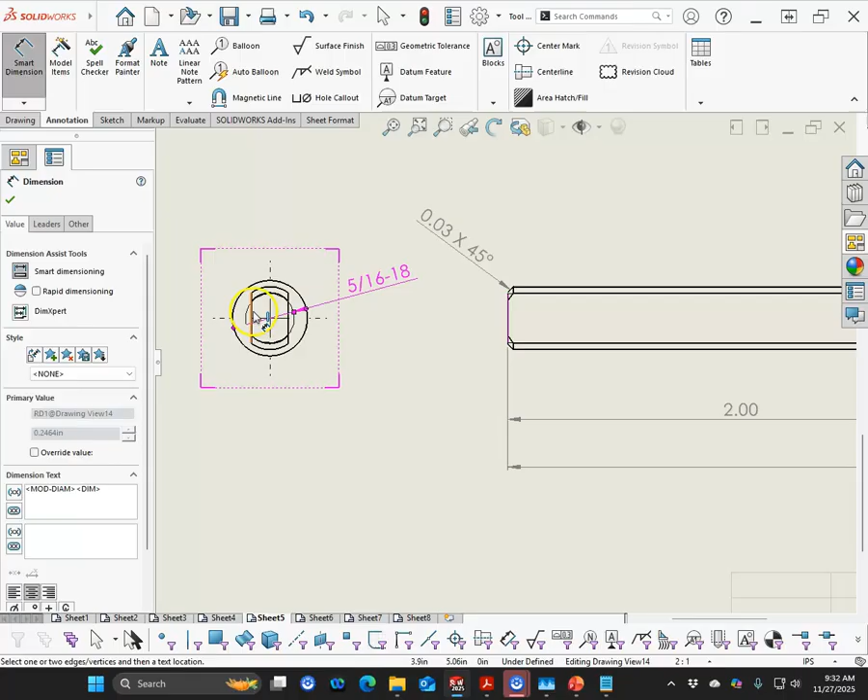Let's go smart dimension, and we'll put in our size, 5/16, 18, and then the width is also our tolerance dimension. So let's at least put that one in 3 decimal places as a reminder, and we'll go back and set the limit on it on the next pass. We'll talk a little bit more about tolerances.

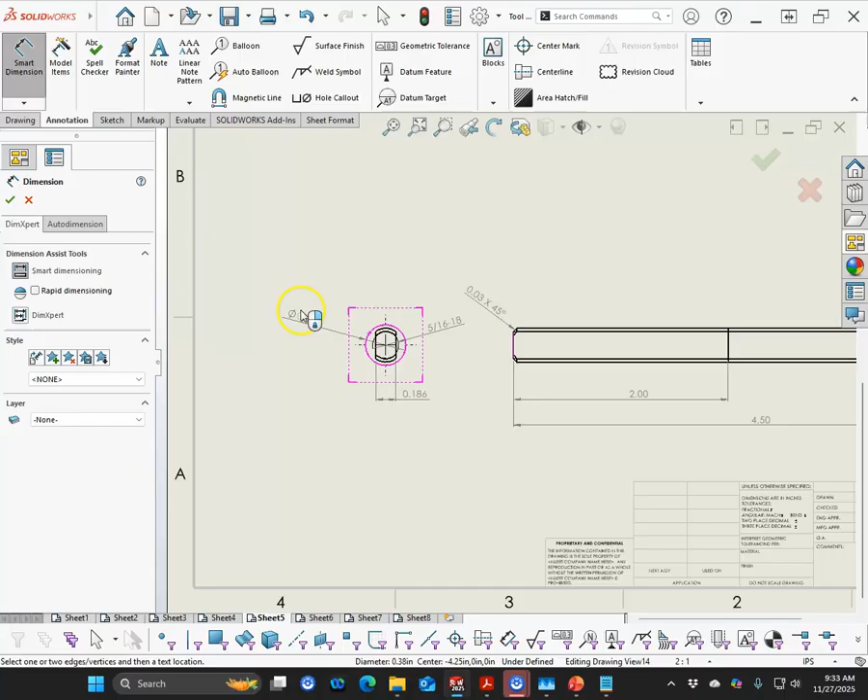And then the outside dimension, that should put us pretty close. All right, we've got a few dimensions on that one. Okay, so there was a relief, and that relief was the inside. Went to the 7/16, 14.

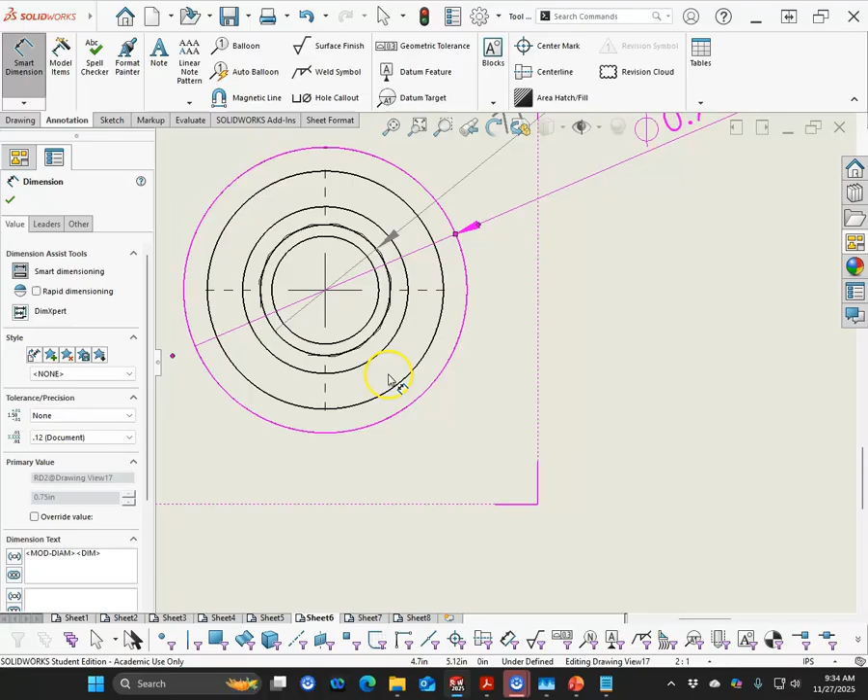All right, we'll go 7/16, 14. That one's a little hard to figure out what was going on. Probably going to need one more view then, maybe not if I put in the square. Depends on how the symbology pulls out on that one. So, 0.34. And then we need the chamfer dimension again.

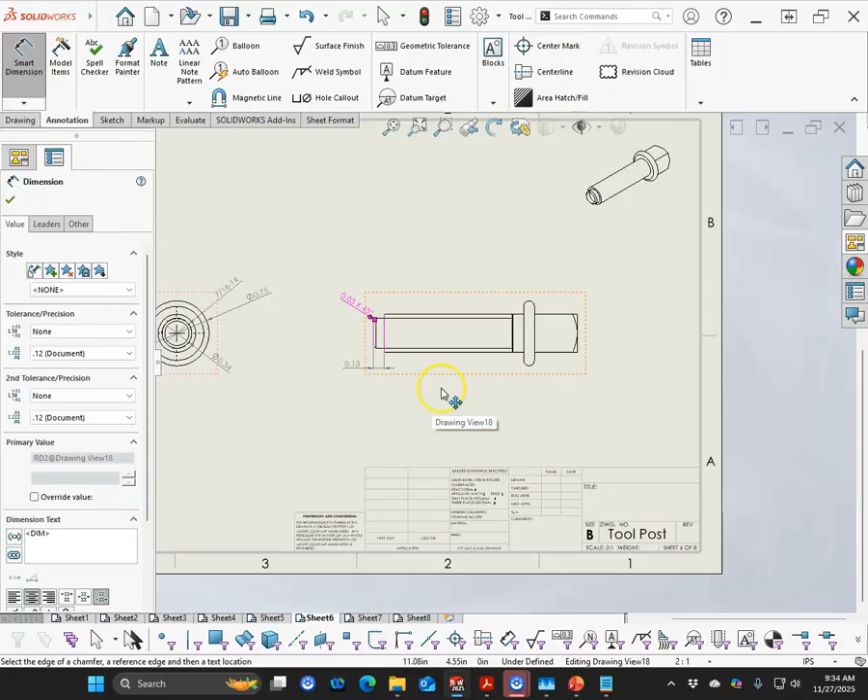The length. Let's go ahead and bring the length up. All right, don't know what it picked, but it didn't like something. I'm just going to escape and start over.

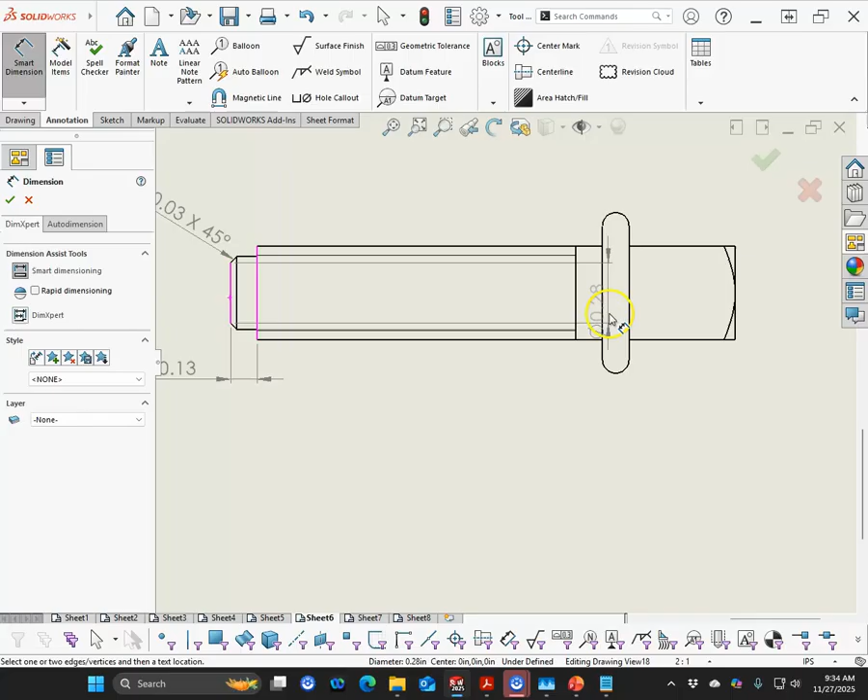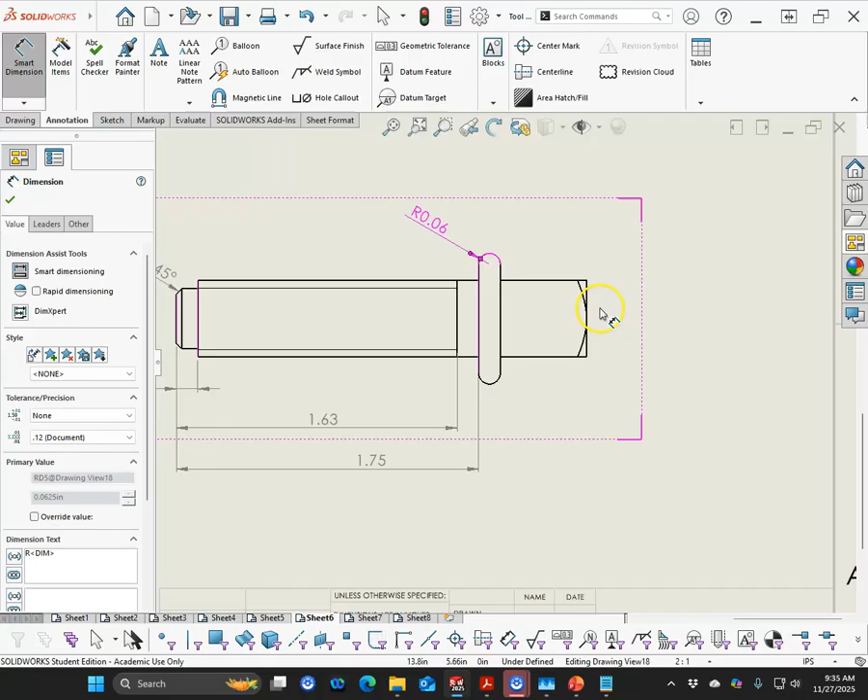So the 1.75, I would probably go ahead and make that one from the end, because that makes a little more sense. Let's go ahead and put a radius on that. So the chamfer on this one is going to be a little strange on the call out. Don't know that I'm going to be able to pick that one. And because it kind of goes into the cut revolve, it's going to end up being more of a sphere, or more of a spline.

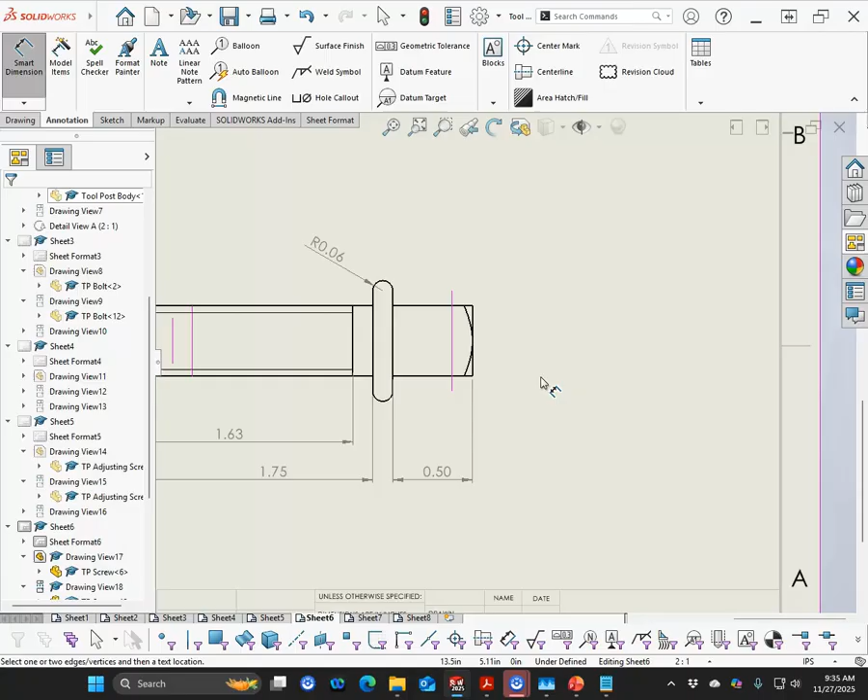So put the 1/2 inch. In this case, I may just put a note so that it gets attached: 40 or 30 degree, I think it was, and we'll add the symbol. Have to go back and verify that one.

I'm not sure there's an easy way to do that other than it comes up tangent. So maybe let's see where that view comes in. We will go back into the drawing, projected view, bring that in, and basically it knocks the corners off.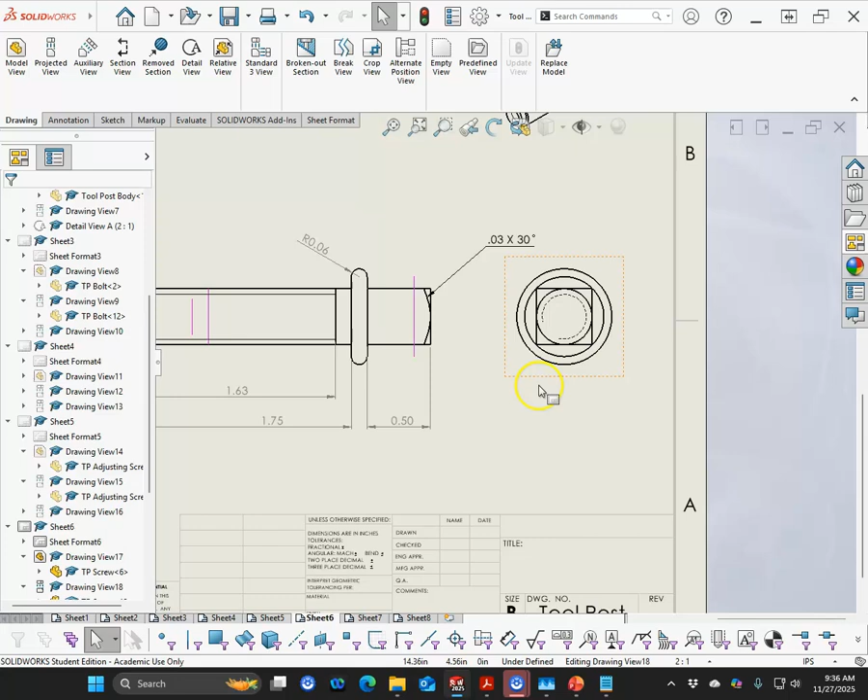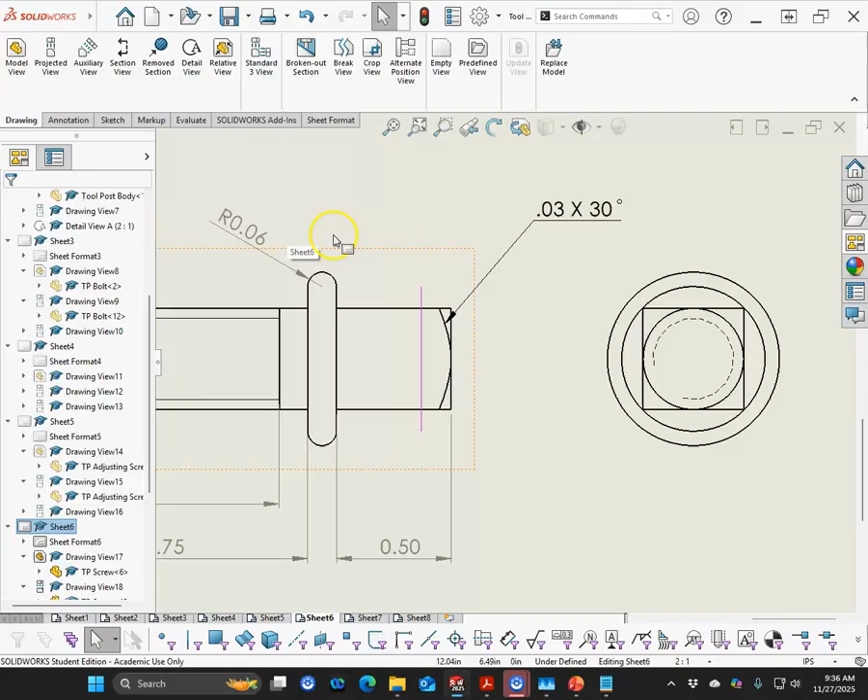Now let's see what that number ends up being. So if I go between those two, now it's actually a distance of, wow, that was a weird distance. I don't think that's what I had in mind, but if we put that in there...

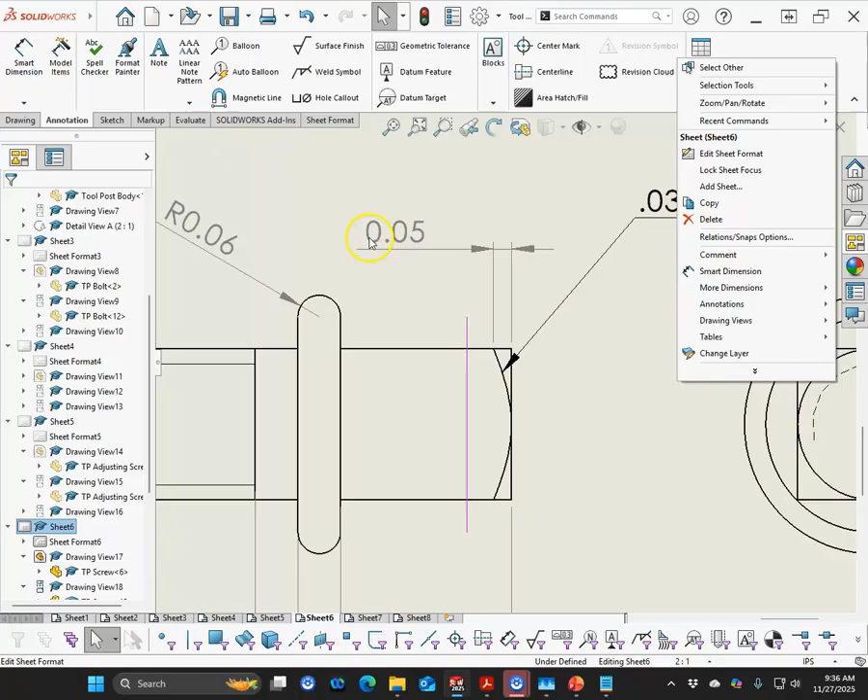So 0.05. Let's just go ahead and make that one a reference. I don't know that I'm getting any good description out of that, so...

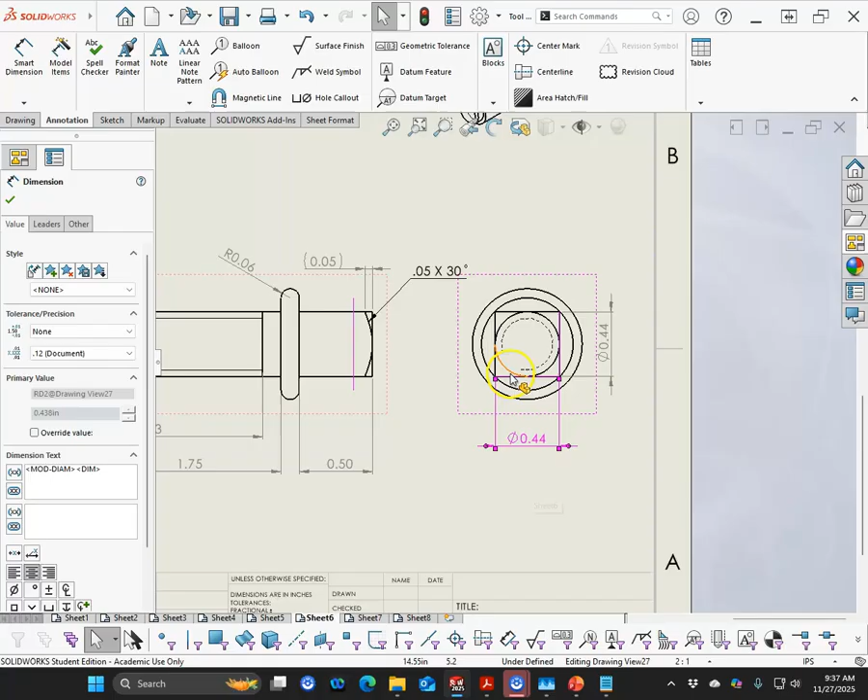And if we're going to go that route, we'll put 0.44 by 0.44. Now there is a symbol. Oh, it went to diameter. Well, it does match the diameter, so being the square nut.

All right, let's move these over a little bit, kind of clean up as we go into the slotted washer. It's a radius of 0.44. I would like that one to be a diameter. And then we'll go to the inside. We can do the overall.

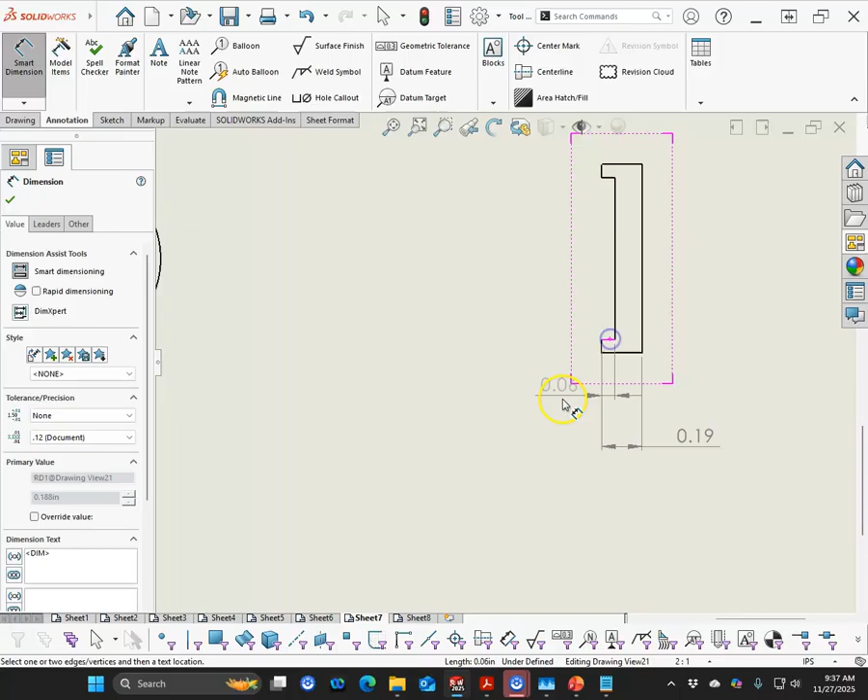And then the relief. And then we know that that is going to also be a toleranced item. So let's go from 2 to 3 decimal places. And we'll see if there's any other spots where we need to add in those tolerances.

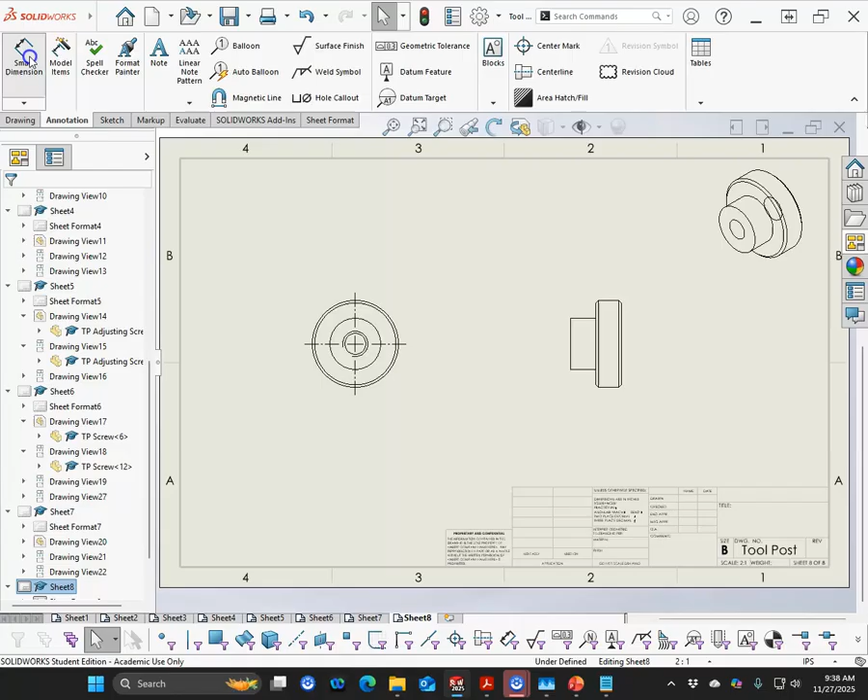All right, so we'll move this along. We have the diameter. We have the OD. And the hole callout should pull up for the 5/16, 18 through.

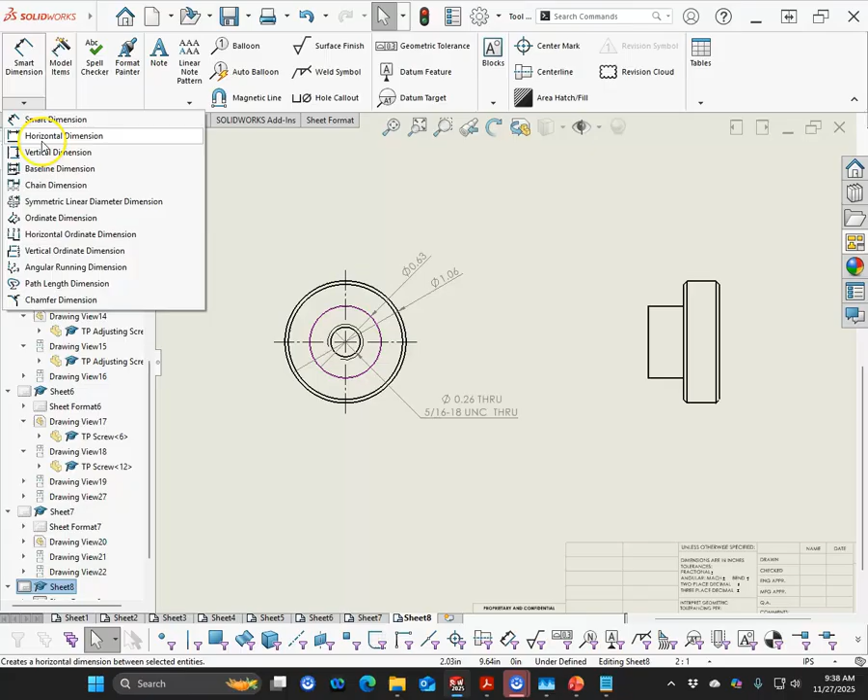We have the two chamfers. I don't know that I'm going to worry about it—maybe on the optional pass we'll go back and split the jog line. But one of the things we can do is just tell it that there are 2 times for that chamfer.

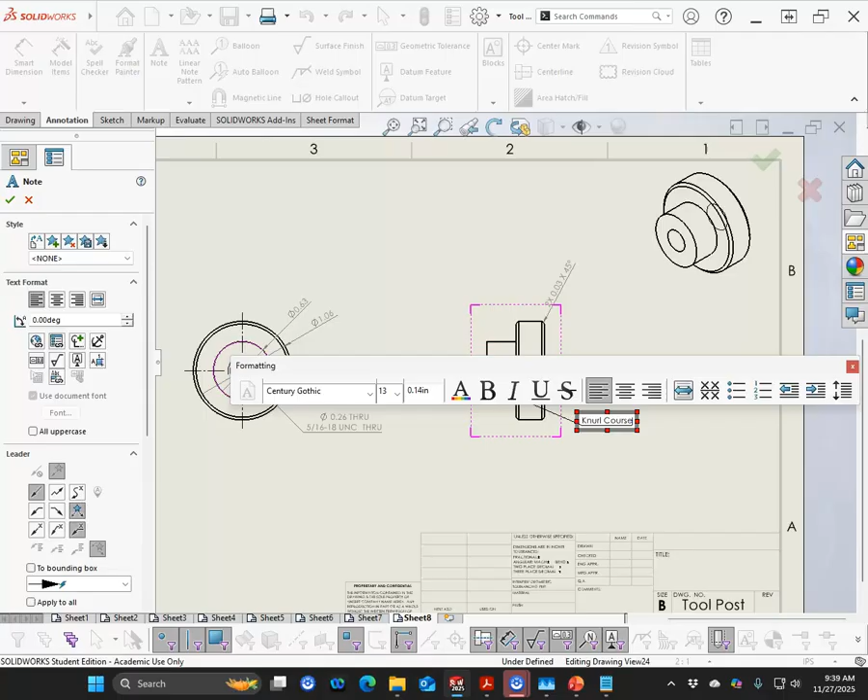And then because we know that there's a knurl, we'll just give it a coarse description. All right, so fine knurl, coarse knurl. Since this is going to be a tightening, the coarse gives you more of a grip. What else do we need? The depth and the overall.

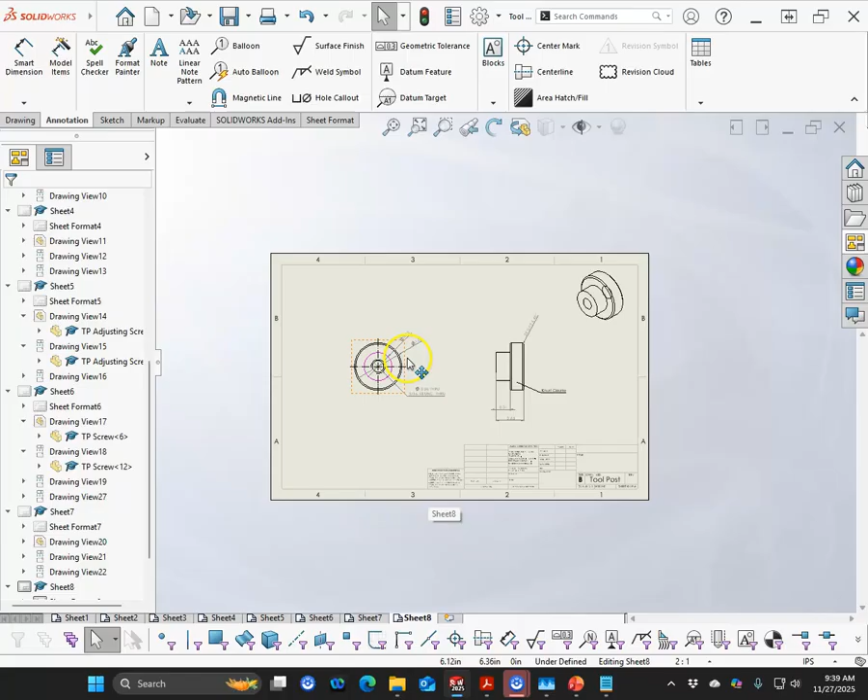Okay, so we've now made a dimensioning pass. Going back through, let's look at the bilateral on that one. I would want it to be able to get a little bit bigger. So let's stay with the limits since we started with the limits. So the slots get the ability to go a couple thousandth bigger.

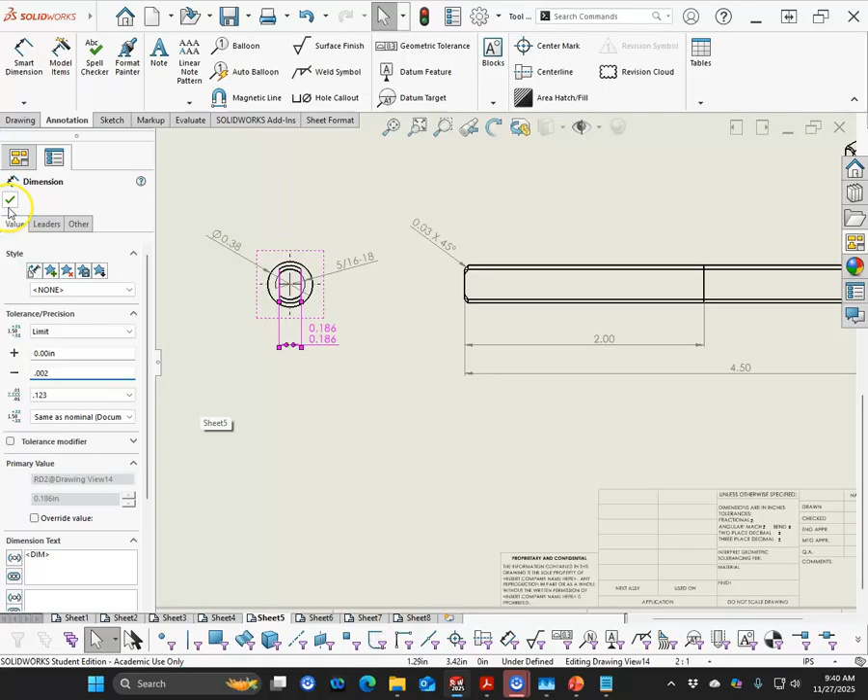And then we don't really need anything on that one. This one was the 186. It should be able to go on its limit 2 thousandths smaller. And then this one we already did as a bigger. Nothing really here to work with.

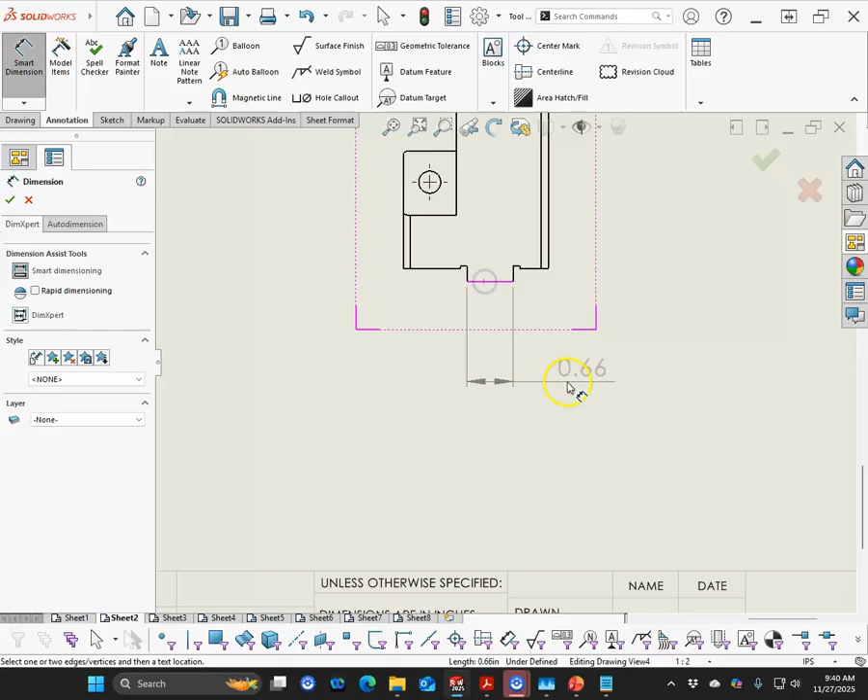And then let's go ahead and delete that dimension, and we'll look at this from the standpoint of it needs to fit into the slot, but I don't want it to grow too much bigger. 656. So most of the T-slots that I've worked with lately have been 5/8. So maybe the 16 millimeter 5/8. So that one seems a little bit large.

But let's go ahead and make it a minus dimension, and I'll be a little more generous with it and tell it that it can be 5 thousandths smaller. So smaller means minus. Okay.

So does all of that geometry make sense? Okay, and we already have the depth there. A location—since I missed the location on that one, we'll go ahead and put it here. Make sure I'm not duplicating anything. Nope. And we'll build that through. All right.

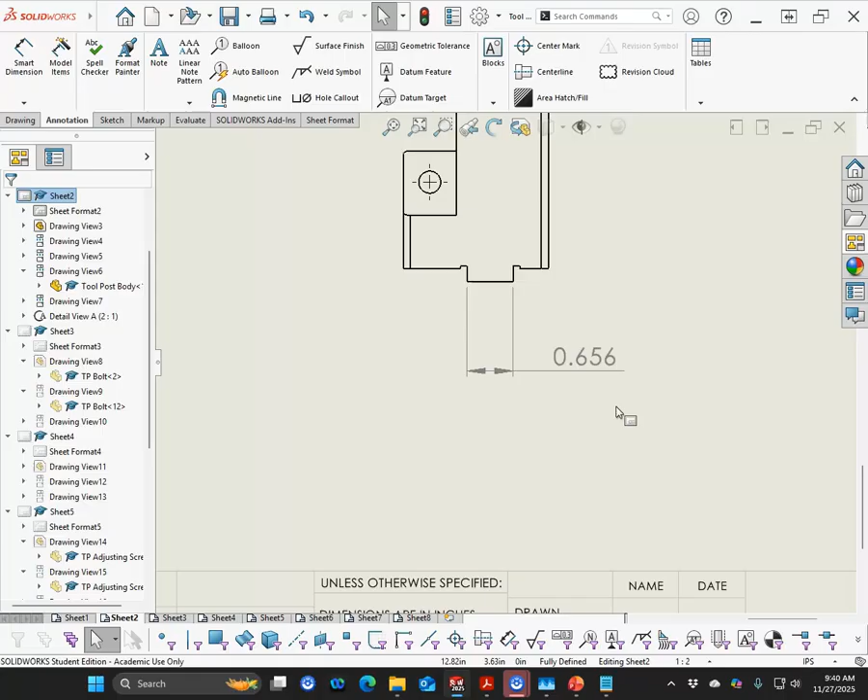So the next process we aren't going to do in this phase. Let's go ahead and save, and then Control Q to get rid of my ghost lines. If you get some portion of these dimensions in, this is what I would consider up for review.

Going through for redline, what did I miss? What mistakes did I make? And then the next step in the process would be looking at this from the standpoint of what GD&T do we need to put in—what geometric tolerancing, flatness, parallelism, critical dimensions we've already identified with our limit tolerances, but then going to that next step of building out the geometry to be able to control those fine details.

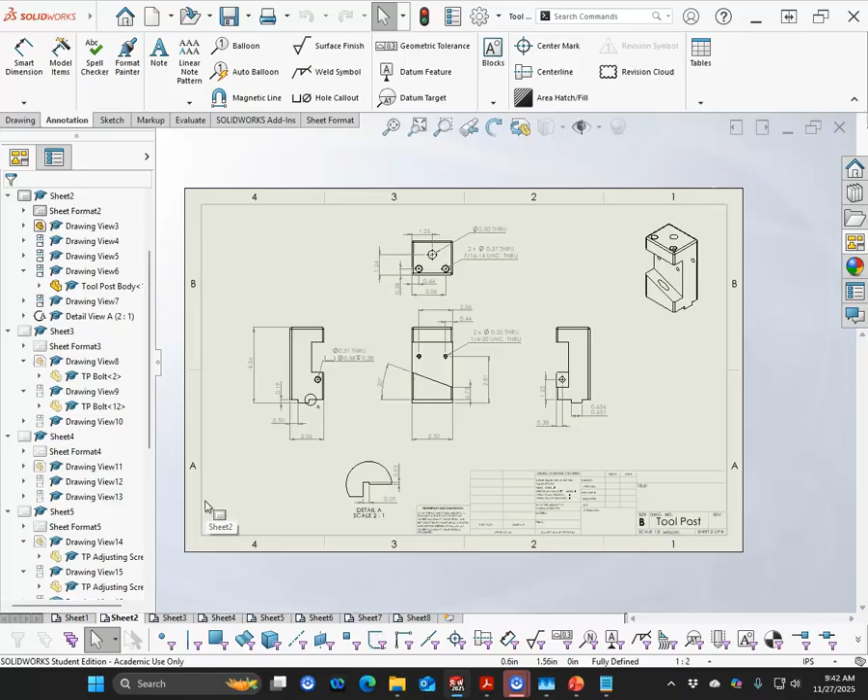All right, so that completes the final project, and the next videos will be the optional, let's take it to the next level.